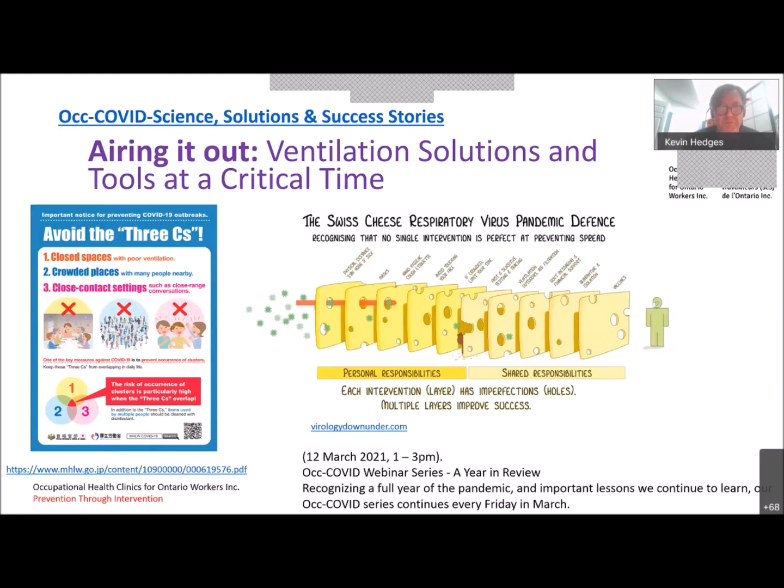There's a very busy slide here, but I did come across a paper recently published on the 10th of March, from the British Medical Journal. It does really talk about the increased risk from the new variant of concern with a mortality hazard ratio of 1.64, which represents an increase in deaths from 2.5 to 4.1 per 1,000 detected cases. In the conclusion, it says that the probability that the risk of mortality is increased by infection with the variant of concern is high. So really, we're in a critical period now.

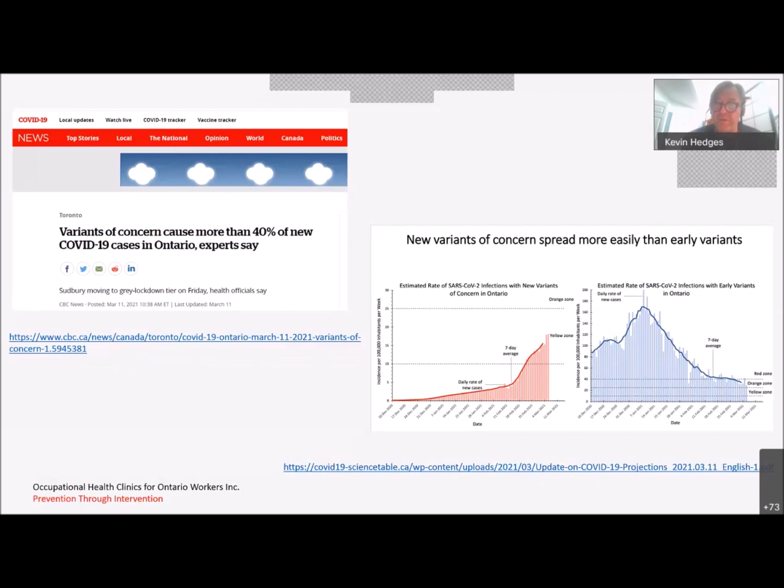So then let me introduce our speakers. We've got Dr. Liangzhu Wang from Concordia University. Dr. Wang joined Concordia in August 2010, has been the Concordia University Research Chair in Building Airflow and Thermal Management. He earned a PhD degree in mechanical engineering at the School of Mechanical Engineering, Purdue University, West Lafayette, Indiana, USA, in 2007.

Our second speaker is Thomas Smith from FreeFlow. I found out about Thomas through a webinar that he co-presented alongside Lisa Brosseau, and it was a really fabulous webinar. You can actually see that webinar online if you go to the FreeFlow site. He's the president of FreeFlow. He's worked for a long time providing safe, efficient, sustainable performance of labs and critical workplaces. He has a Bachelor of Science in Mechanical Engineering from North Carolina State University and a Master of Science in Industrial Hygiene, what a great combination, from the University of North Carolina.

He's served on numerous committees for development of national and international standards on ventilation for safety and health, and he serves on the board for the International Institute of Sustainable Labs and is a member of the Alumni Hall of Fame for the Mechanical and Aerospace Engineering Department at North Carolina State University. And I just want to welcome back Dr. Jeffrey Siegel.

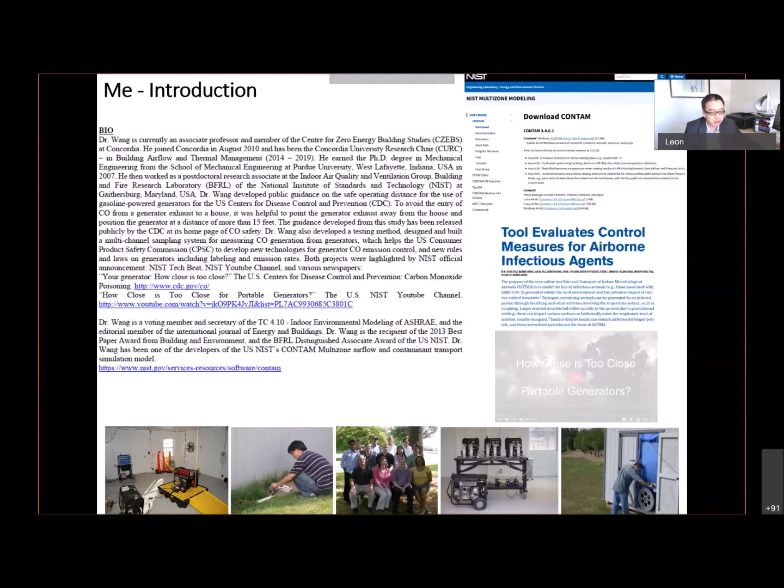Then talking about COVID, as Val mentioned, it was almost over a year before COVID-19 was recognized as a global pandemic. And it was not until early October last year that airborne transmission was recognized as one of the major routes of transmission.

When the infected person speaks, talks, and sneezes, the virus-loaded particles can travel a far distance driven by the air flow. Depending on the building ventilation system, you may have mechanical ventilation or natural ventilation by only opening the window.

There are different strategies to mitigate the risk level. Wearing a mask is considered the most effective measure, and staying less time in the buildings and reducing the number of people in the space will also help. On top of ventilation, increasing the outdoor ventilation rates through your mechanical system or by opening the window will also help to dilute the viral load in the space.

If you have a mechanical system, upgrading your filter in the ductwork, like MERV 13, can also help. And lastly, but not least, using portable air cleaners will also be a strategy.

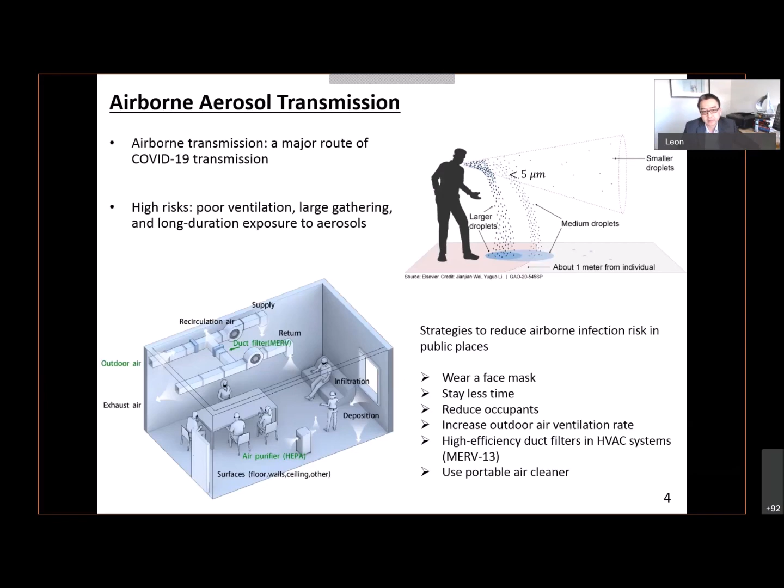So I think one of the first important things, and critical, is to quantify the airborne infection risk. There's a well-known model called the Wells-Riley model. The concept of this model is in terms of quanta. If we have one quanta of COVID-19, that's calculated, the chance to get infected will be around 63%, as you can see from this equation.

So the quanta numbers inhaled by the person is a function of the concentration in the air, that's the C average, and your exposure time. The longer you stay, the higher the risk, and also the number of people in the space, the percentage wearing a mask, the mask efficiency, etc.

So the first concept to evaluate the risk is called individual risk, or conditional probability of infection. What it means is if you have an infected person in the space, in the room, as you are in the same room, the chance you can get infected is called the individual probability of infection.

In comparison, another concept is called building or community level infection. This is a function where the risk is a function of the prevalence rate in the region or city. So if you're not sure if there's a person infected in the space or not, the probability of infection of a person in the room depends on the local prevalence rate. And the more people in the space, the higher probability of an infected person being in the space. That's why we call it the building level infection risk.

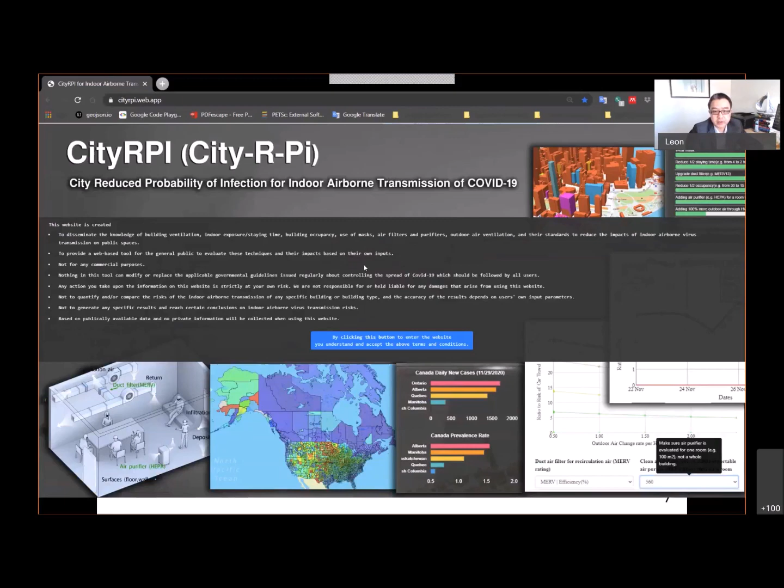So this is the website. If you search, I think we can also provide a link, the front page. I also have the website opened up. Can you see my screen? Yes. So the first thing you will see on the front page is a disclaimer, and then you click here to get in. The first thing we'll look at is the whole North America map, USA and Canada.

And the color shows, red color shows higher risk of infection for airborne transmission. All these rates are calculated based on the daily prevalence rate for a city. You can move your mouse around. Right now for the apartment type of building, I think it's around Missouri in the States.

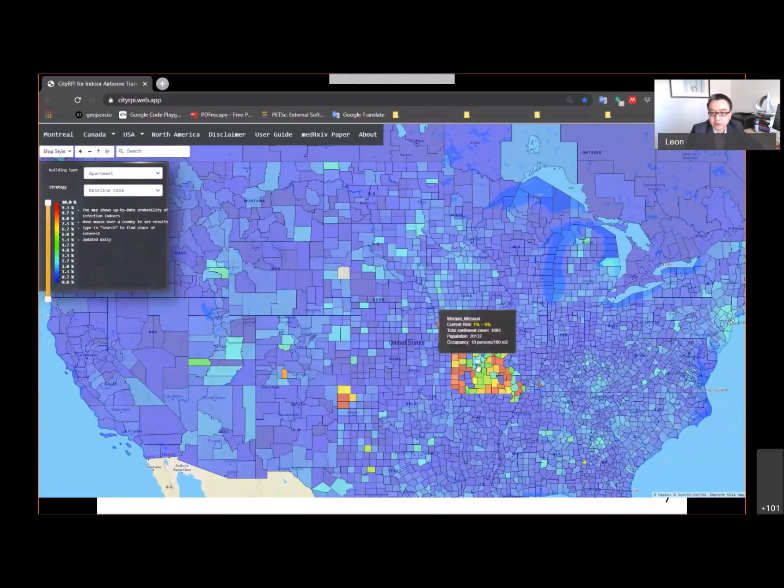If you go to Canada, you can also check Quebec. So right now for this region, the current risk, in terms of building risk, is less than 1.1%. The total cases so far are close to 9,000. And then you can also select different types of buildings.

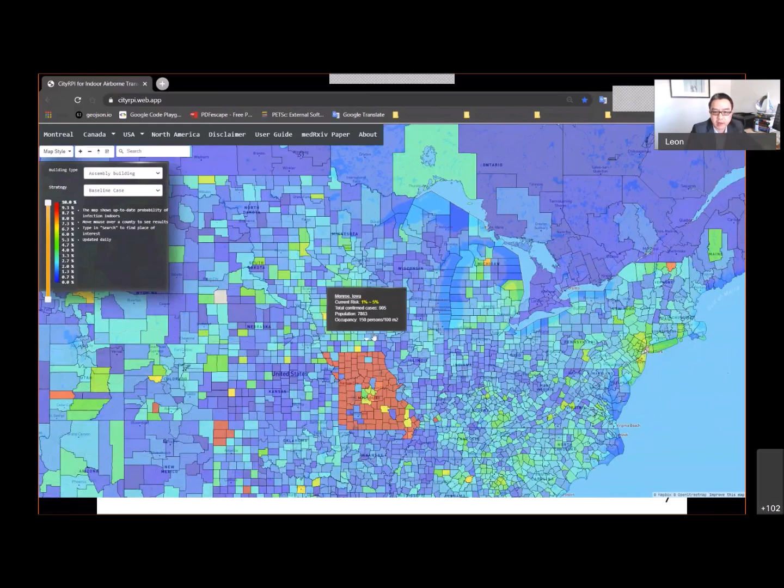For example, for an assembly building, where we have more people's occupancy and probably more poorly ventilated spaces, you can have a higher risk. At this drop-down box, you can select different strategies to get an overall idea of how effective different strategies can be.

So wearing a mask, how effective is that compared to the baseline case of no mask. You also have reduced staying time, filtering with MERV 13 on a relative scale, and ventilation rates. So this is the one user interface.

Another user interface is on the city scale. I click Montreal. On the left-hand side, you can see a drop-down list showing the current prevalence rate and new cases in descending order. For example, in Canada, as of today, the province with the most new cases is Ontario, with about 1,371 cases. But comparing among all provinces, Saskatchewan has the highest prevalence rate, about 0.53%.

You can also compare for the USA, the city with the most new cases is New York City, with over 7,000. This database is updated daily using the New York Times database.

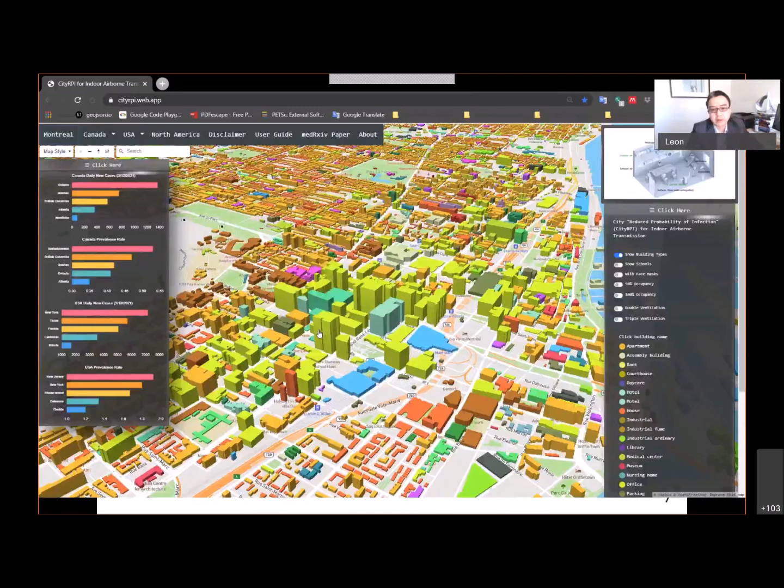On the urban scale, you can move your mouse around to check buildings of interest, and there's a list of strategies you can evaluate and compare. On the right-hand side, there's a list of building types. You can hide or unhide buildings. If you click apartment, it shows these apartments, and you can check what the risk and strategies would be for an apartment building.

I also provide a link to show schools, which I think is one of the major concerns. You can also check strategies on the city scale, 50% or 100% occupancy, ventilation, etc. The color shows how effective the different strategies are.

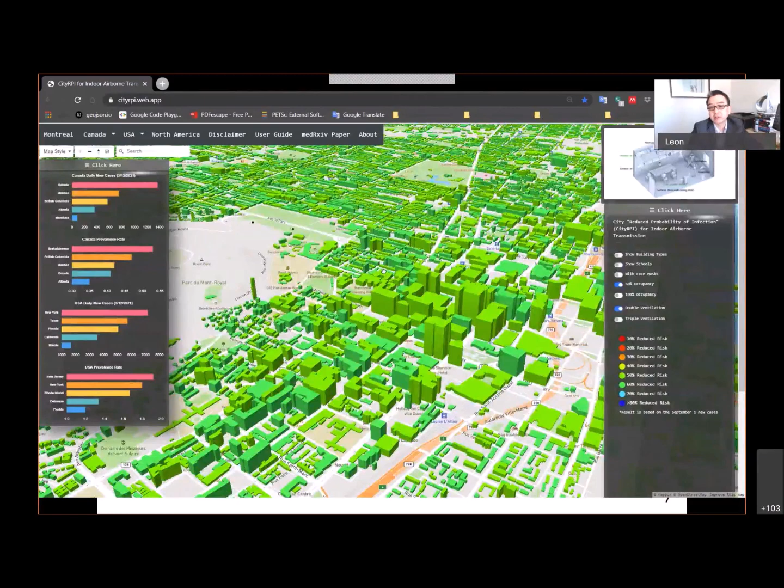On the other hand, if you are a building owner, engineer, or manager, you know more details about your building, for example the size of your space, the number of people, and your ventilation system, air turnover rate, etc. You can search for your building and click to provide information for your own building, so you can do a more detailed analysis.

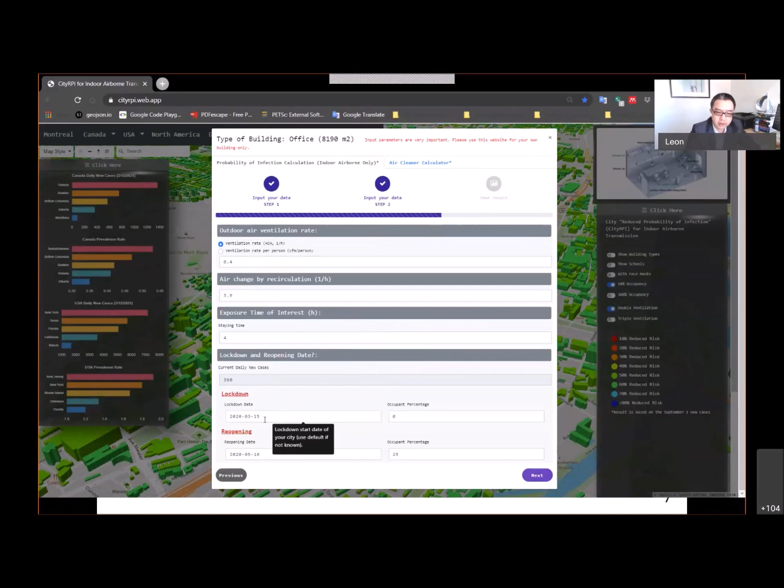Different cities, provinces, or countries have different lockdown dates, so you can also provide the lockdown schedule for your city. If you click next, it gives you the full period risk level in terms of building risk, for the last month or last 7 days.

There are also ways to evaluate the risk level versus outdoor air ventilation rates, with or without a mask. At the bottom is a comparison for different MERV ratings, 8, 9, 10. Each MERV rating provides a different efficiency of filtering viruses, for example 20% for MERV 8, and up to 95% for higher ratings.

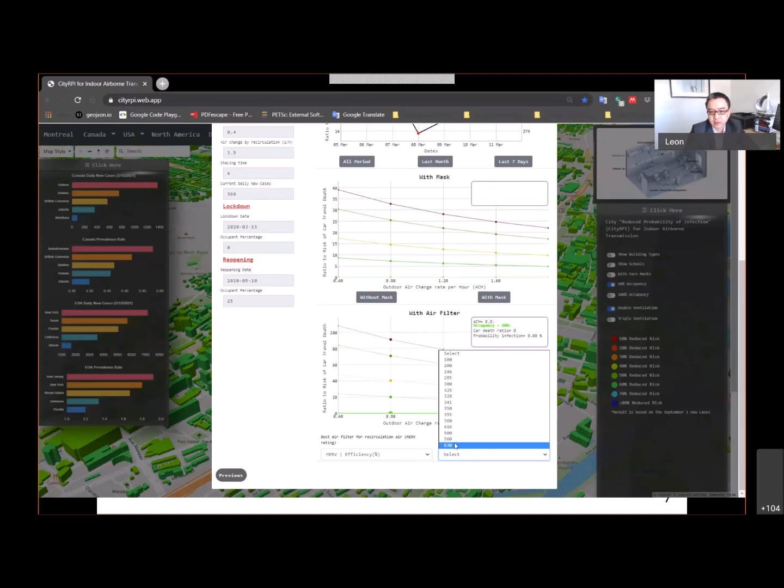On this side, you can also select if you would like to choose an air purifier or cleaner. You can choose the capacity, called CADR, clean air delivery rate, and see how effective different capacities of air cleaners are.

There's another tab called the air cleaner calculator, based on the Harvard and CU Boulder portable air cleaner calculator. If you want to size your air cleaner for a space, you can provide information here, and there's a scale to evaluate the acceptable ventilation condition: good, excellent, low, bare minimum, or ideal. In this case, a 4 to 5 air change rate is considered good ventilation conditions by this calculator.

So that's the website. If you have a chance, take a look, and if you have any comments, we are still improving the website, so please send them along.

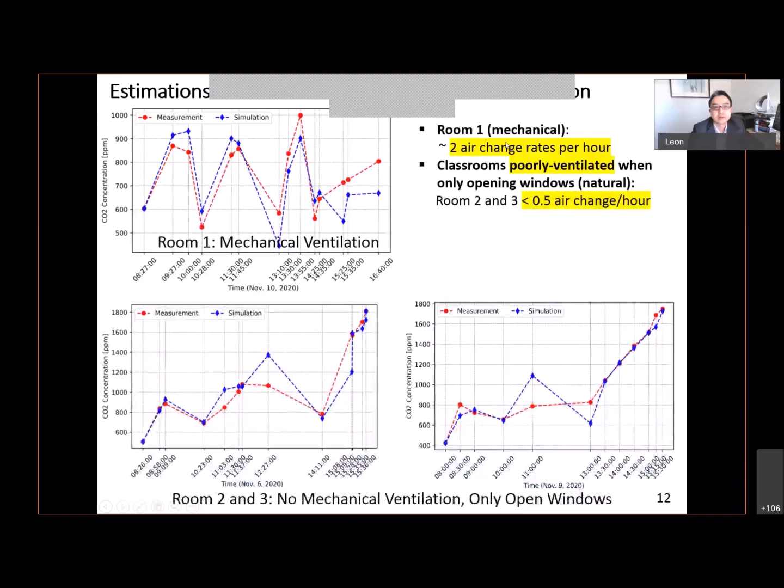I think Sarah mentioned the importance of CO2 monitoring. Last year, near the end of the year, I think November, some Montreal school teachers measured the CO2 level in classrooms secretly, and they had the data but didn't know how to interpret it. In some rooms with mechanical ventilation, the concentration could be close to 1,000 ppm. Some classrooms with natural ventilation could reach 2,000 or even higher concentrations.

They contacted me and I tried to help interpret the data and relate CO2 levels to ventilation conditions. They provided the type of building, ventilation system, volume, occupancy schedule, number of students, and age. Age is important because different ages have different CO2 generation rates.

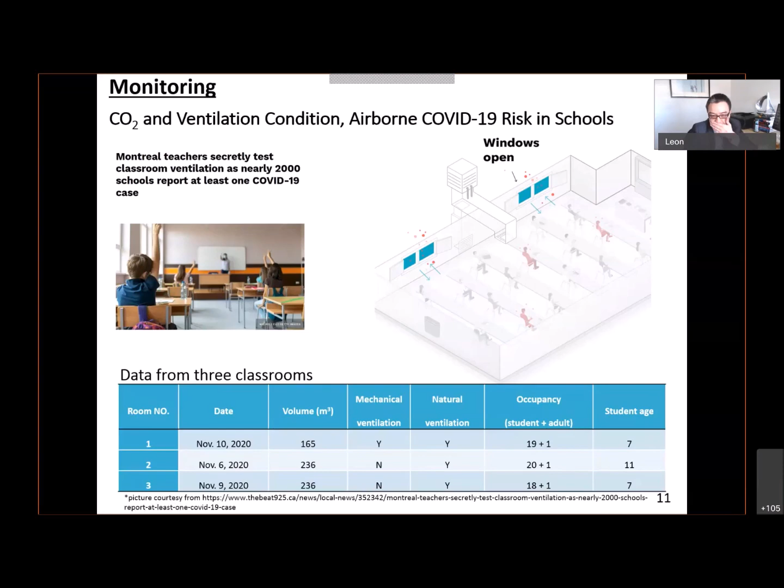So as you can see from this result, room 1 is with mechanical ventilation, and the CO2 level found is close to 1,000 maximum, that's the red line. For rooms 2 and 3 with natural ventilation, where the rooms only have windows open, at the end of the day the concentration level is close to 2,000.

So by using a method called Bayesian calibration, a statistical method where you can evaluate the uncertainties and probabilities of different parameters, we can infer what the ventilation rate would be based on the CO2 measurements.

Based on these methods, we are able to estimate for room 1 with mechanical ventilation that the air change rate is about 2 air changes per hour. For rooms 2 and 3, where only the windows were opened, the ventilation rate is less than 0.5 air changes per hour. So compared to the 4 ACH I mentioned previously, all 3 rooms are poorly ventilated, even the one with a mechanical ventilation system.

And to help teachers get a better idea for other cases, we developed these charts. What these charts tell us is how we can estimate ventilation rates from the time-averaged CO2 level.

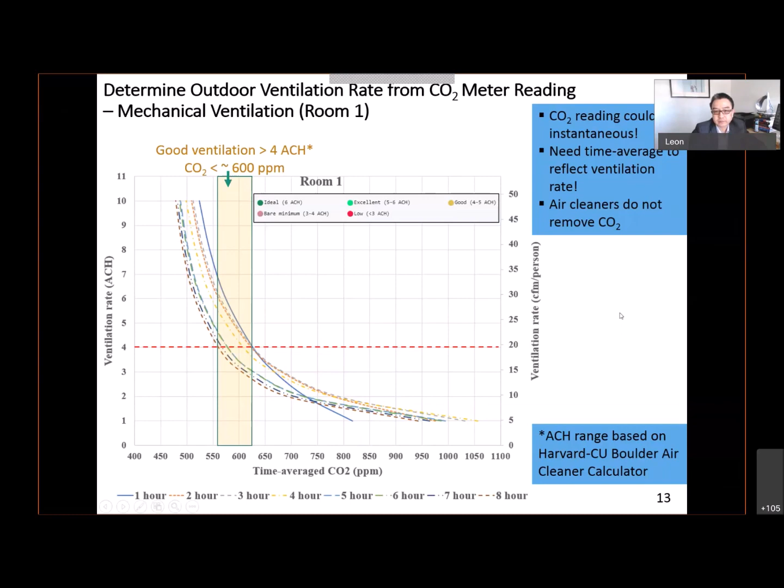To avoid spreading, the time-averaged CO2 for 6 or 7 hours of exposure, we're looking at 500 to 600 ppm for the COVID period.

Luckily, the Montreal schools have realized the importance of CO2 monitoring, and they started collecting CO2 data in over 400 schools since about 2 months ago. The data is still updating on their website, so we're helping them analyze the data, probably using the same method we are proposing.

And once we have risk evaluation models, we know what the existing conditions are. Now the next thing is how can we mitigate the risk, particularly for public buildings, considering we're likely to have reopening of public buildings pretty soon.

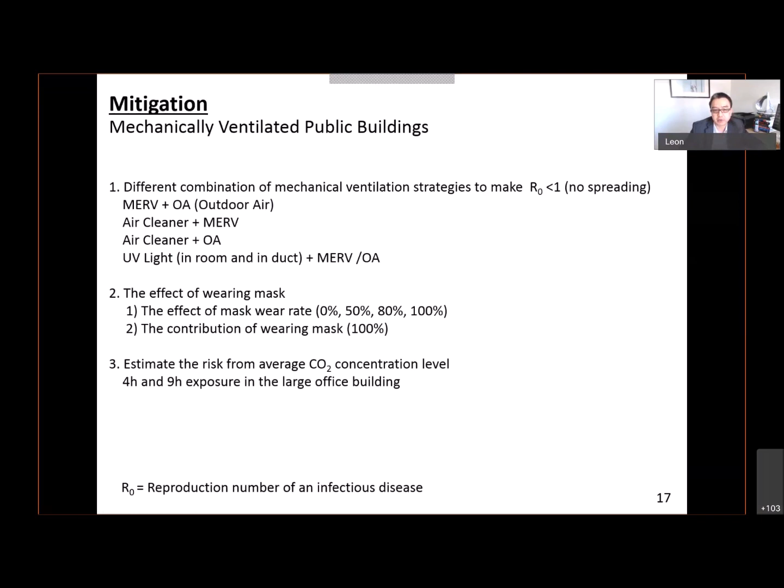So these are all the models we can evaluate. At this moment, we're focusing on medium office buildings, large office, small hotel, retail, and secondary schools.

All these models are available and based on the Archetype library developed by the Department of Energy, which they provided to us. So I'll show you a result here.

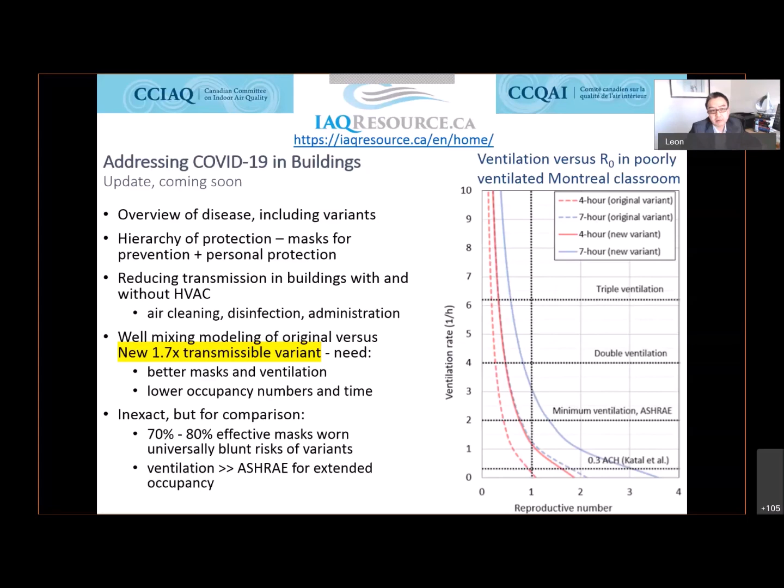Lastly, I would like to acknowledge the financial support, partially by the NSERC Discovery Grants, and special thanks to my colleagues in the States, Dr. Miller and Dr. John Zhai from CU Boulder, Dr. Michael Lacasse from NRC through the Eureka Project, and a few others at NRC, and Dr. Meg Sears from CCIAQ and other CCIAQ members working so hard on this module, and colleagues at US NIST for helping with simulation, and of course my colleagues at the Centre for Zero Energy Building Studies at Concordia.

I also need to acknowledge the support and data providers of CO2 data, and all the contributors and collaborators from Montreal schools. So that's my presentation. Thank you very much.

Thank you very much, Dr. Wang. There's a great amount of information there, and it's great that we can now have a look at the tool and play around with it. And really, it's about risk communication, isn't it? What gets measured gets noticed, and what gets noticed gets action. So it really helps us focus in on where the higher risks are.

What we thought we'd do is pitch a couple of questions at you. We see a question from Dorothy Wigmore in the chat box, for you, Dr. Wang: What criteria are you using for face covering efficiency in the program? And have you accounted for the new ASTM standard? We know we're just talking about face barriers here, and there are issues around face fit which aren't really dealt with very well, but maybe that's new. I'm just wondering if you'd want to comment on that.

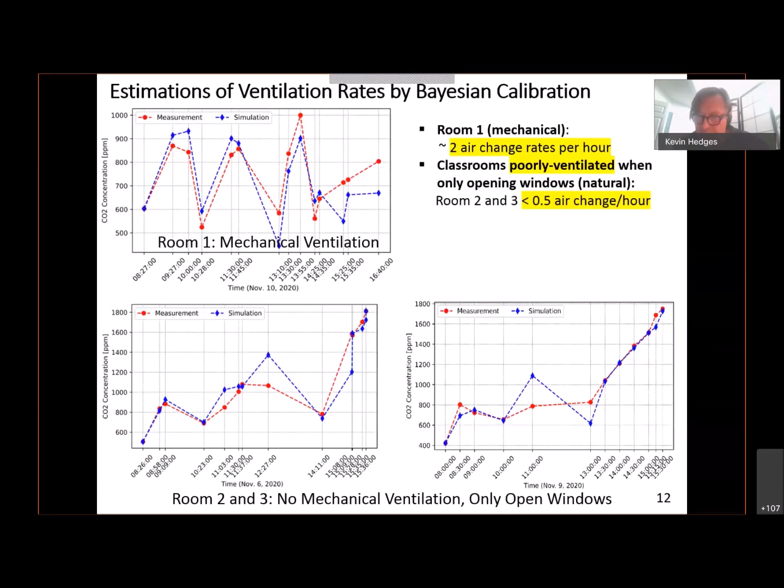Maybe one of the other speakers can address this further on down. Can the residence time of the air in the unit be long enough to be effective? Maybe one of the other speakers might chime in too.

You're welcome to talk about UV light, because for this public building, we do the modeling, and for majority of buildings, we find UV light in the upper room is quite effective compared to the UV light in the duct.

I don't know if that answers your question, but you have to be very careful about UV light because it generates other things, right? I mean, ozone, and it may have other problems. But in our analysis, UV light is pretty effective. I think we assume that UV light increases the effective air change rate, and we use that in the analysis.

Great, thank you. More from Dorothy Wigmore: Can you explain how the number of people in a space affects carbon dioxide? Does it not affect using specific numbers as cutoffs for carbon dioxide?

Yes, like I mentioned, definitely you have different situations. The result I showed we use only for classrooms where the students have a pretty much lower CO2 generation rate. If you consider a gym where adults work out, the generation rate of CO2 can be much higher, and then different strategies should be implemented. So the method we presented can be applied for different situations.

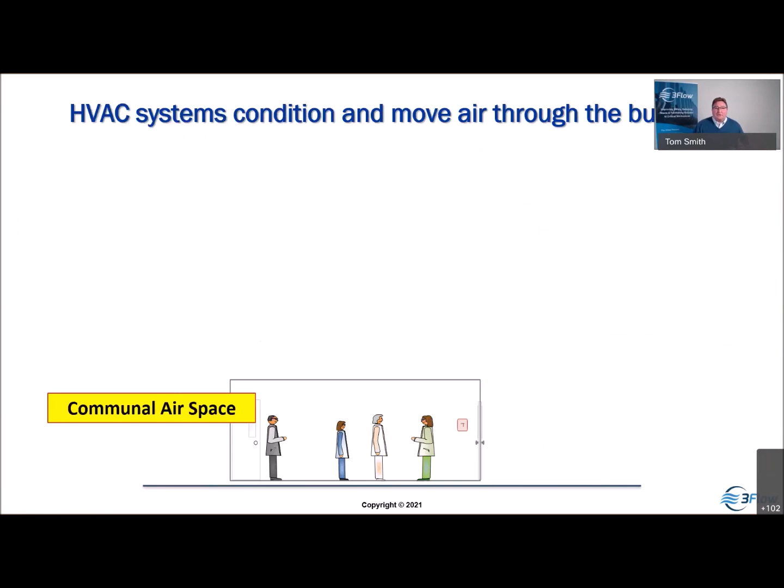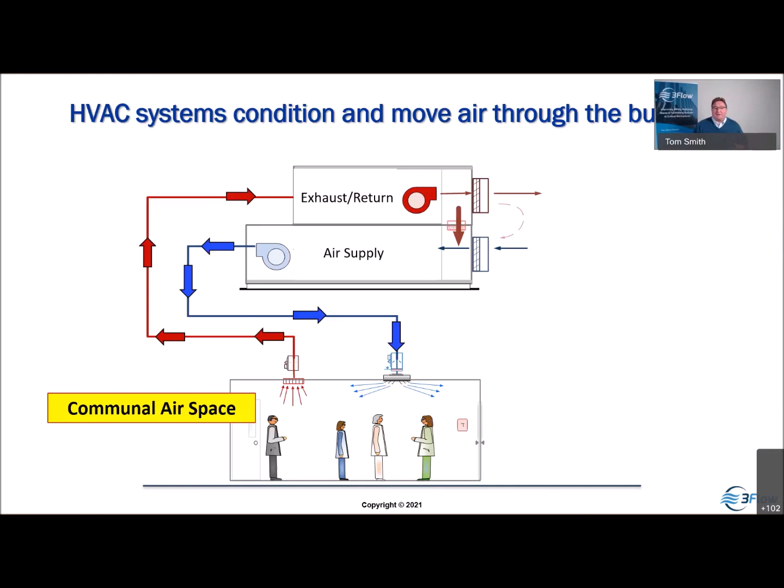Now we can add some ventilation systems, air supply and exhaust. That's going to provide air to the space and bring air out of that space - that's the ventilation component. And we need to look at how much of that air is recirculated versus fresh air.

We can start to look at these systems in terms of what's happening below the ceiling and what's happening above the ceiling. Our remediation measures should focus on what we're going to do below the ceiling, where the spread typically occurs, and how we better equip the systems to provide an environment conducive to safety and efficiency.

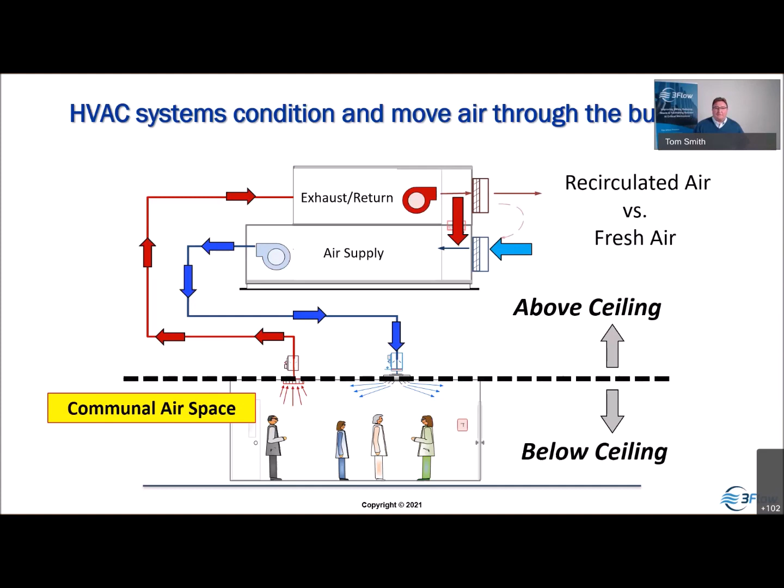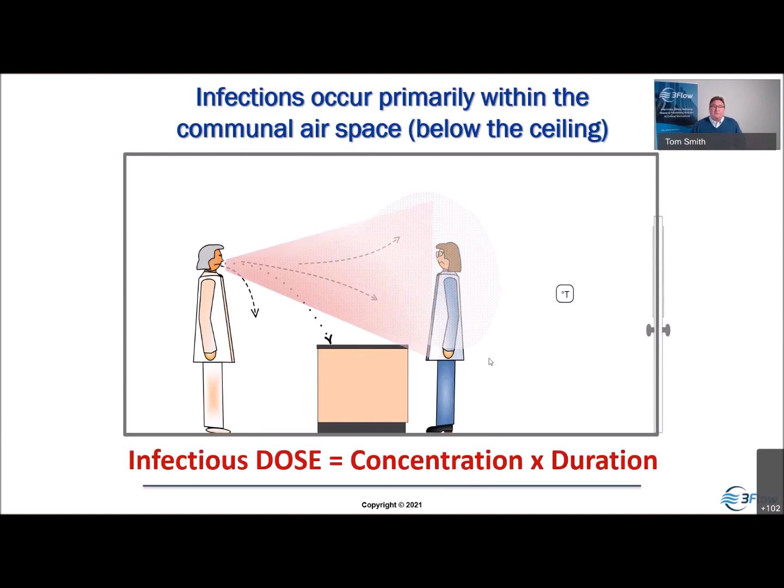So we know that infections primarily occur in the communal airspace, where two people are sharing the same air. One may be infected and the other may be healthy - they're only healthy for as long as they can resist that infection. And so we start looking at what I call the cone of corona.

As people are exhaling, they're emitting particulate which may be laden with the virus, and that may be potentially spread to other people in that space. The amount of material generated by an average person is quite significant - 40,000 particles every 15 minutes. That's going to increase or decrease, as Leon was saying, depending on the activity - it can produce much more or less depending on what they're doing and their state of health.

We don't currently know the infectious dose for corona, so we have to go as low as we can. But the infectious dose is the concentration times the duration of exposure, and that's very important - we want to limit the concentration and the duration.

So now, as we look at this, are you downwind? Are you in the path of this particular concentration?

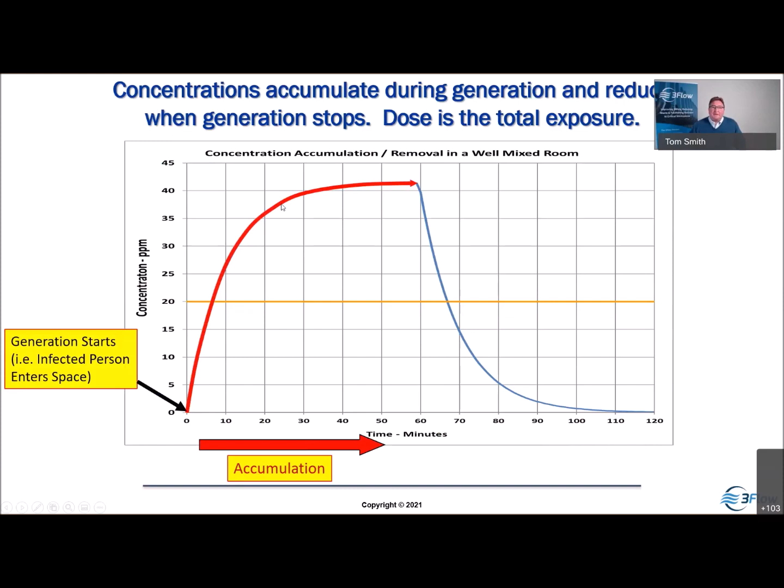Looking at accumulation in a space - when someone walks into that space and they're exhaling particulate, potentially laden with the virus, then it begins to increase in that space. And if it's a well-mixed space, it increases and continues to increase until the generation stops.

Now it's going to reach some point of what we call a steady state concentration, but when that person leaves, it begins to decay. And it's this area under the curve that's known as the dose - it's the time you begin to be exposed till the time that person leaves and beyond, when the room removes those particulates. So dilution and contaminant removal become very important.

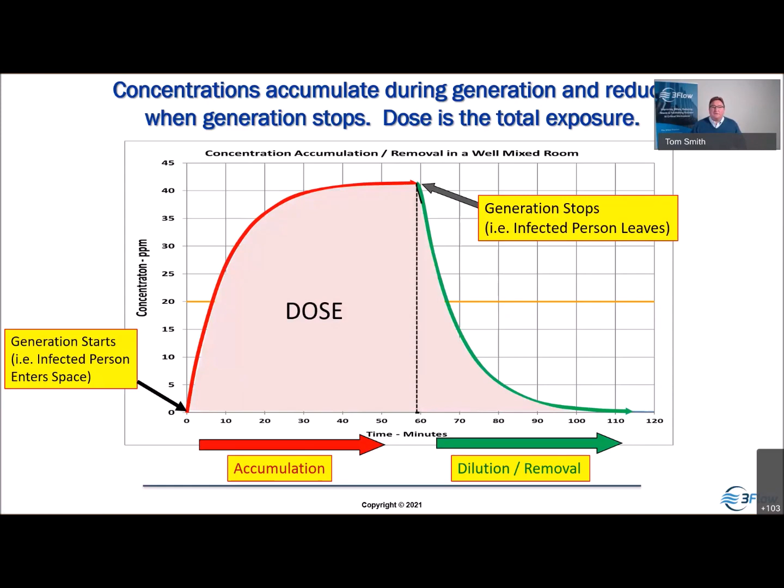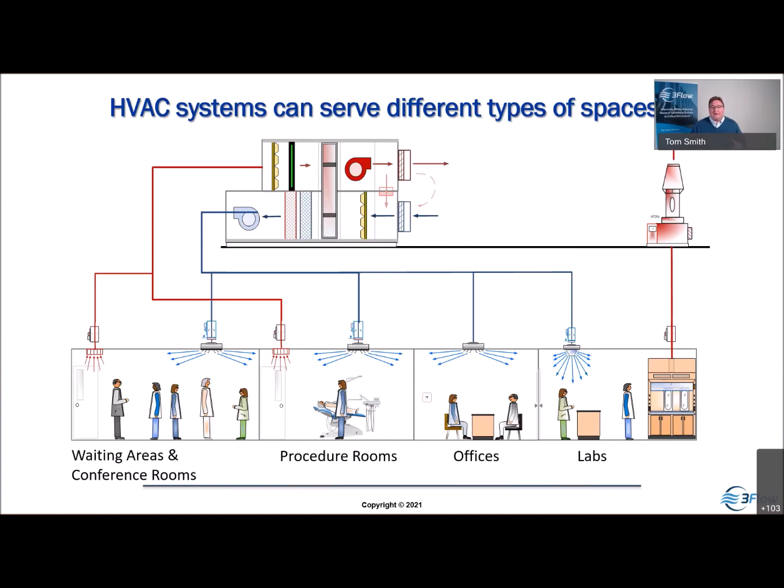All of these considerations are a function of this well-mixed space, but we don't know if that's a good assumption or not. We have to look at the ventilation systems serving multiple different areas - there may be different requirements between a waiting room or a procedure room or offices or labs. They have different functional requirements and therefore may have different design and operational parameters that we have to include.

So we can look at the question: what is good ventilation? What is good for one room?

Is that adequate for another room? And what are the risk factors that might come into play if we're going to evaluate these different spaces? Having decades of experience working in laboratories, I operate a business. I have to have people come back to work. We have different types of spaces, from offices to conference rooms, break areas, and training center. So I need to be confident that I can bring people back into the space safely. And what are these risk factors?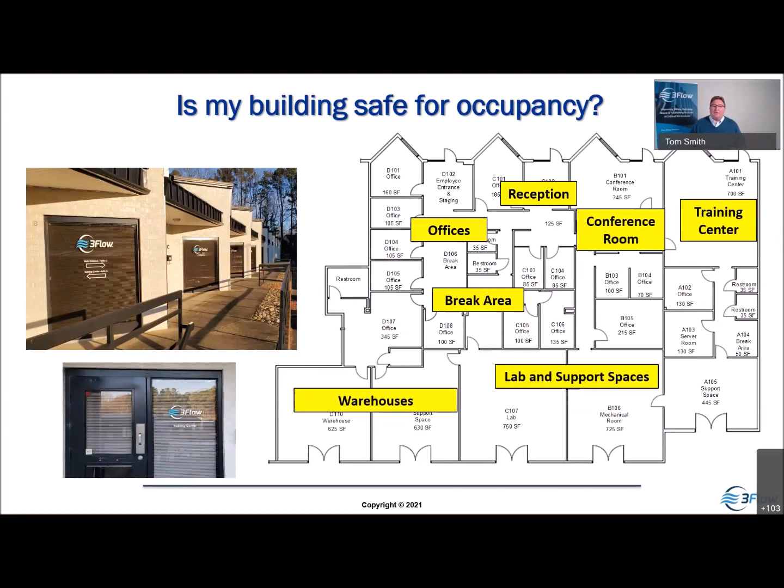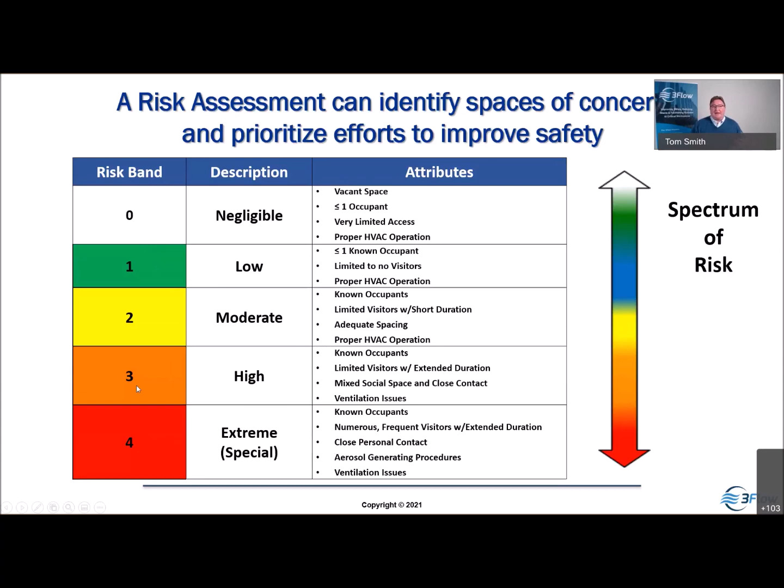That led us to use some of our experience from labs, where we categorize labs in terms of the severity of the hazard, the quantity, how it's being generated, to quantify or create a risk banding process. Negligible might be a space where you have no occupants or one occupant who can't infect themself. As you move down the spectrum, you start including things like ventilation and other administrative controls, and how many occupants are in close proximity—these factors become very important. So you can now look at a way to categorize spaces as a function of their relative risk.

A traditional ventilation investigation evaluates first: what is the risk? What's the demand for ventilation? Where are the spaces of concern? We want to then inspect and measure the operation of the HVAC systems, then look at the airflow patterns within that space. Airflow patterns matter. And then finally, if we have to, we can go to a quantitative test to conduct aerosol tracer studies to evaluate the effectiveness of the space and the benefit of adding mitigation strategies such as local air purification. So let's start first by looking at our risk assessment.

We take our floor plan—it's the first piece of information you need. Get your floor plan, and then on it, locate where people congregate. Where are the known occupants and how many people occupy the different spaces? Where are visitors coming in? How many visitors? It's a very simple analysis to do. That gives us one piece of the puzzle.

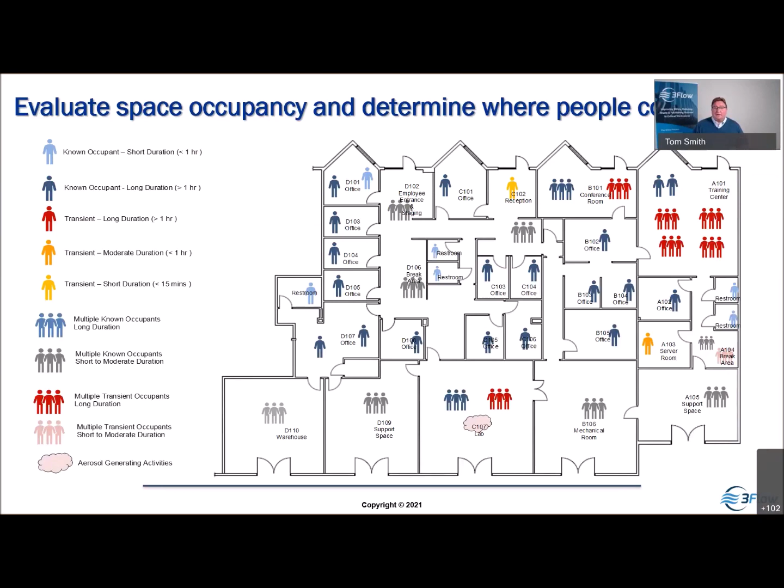Where are people congregating? Then we look at the layout and configuration of the system. We have supply diffusers and exhaust grills, and hopefully they're coupled in each room where you have a supply and exhaust, and hopefully we have ventilation. We want to look at the types of units—are they recirculating, or outside air? How is that operating to help us protect people?

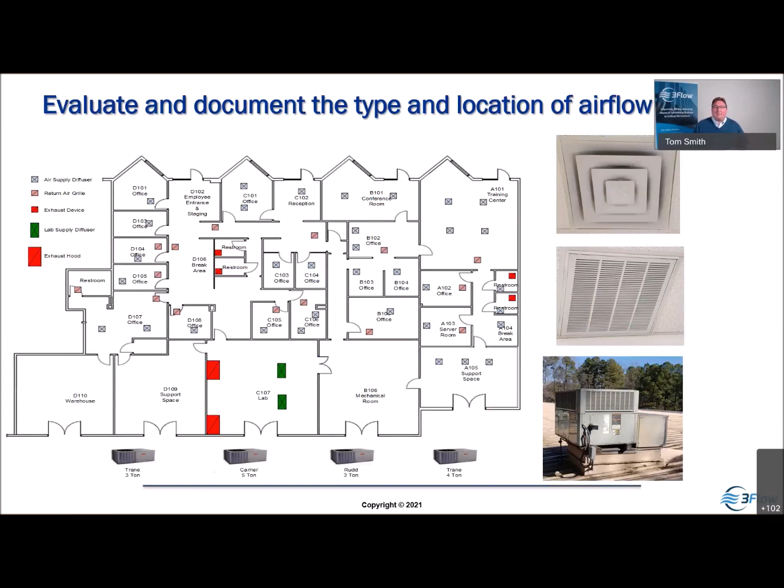Now we take this information and put it into a spreadsheet. We developed a simple spreadsheet—it's public domain, you're welcome to it, just send me an email. Information will be available here at the end. If you like, you can input information about your space, the size and type, the operation, information about your occupants, some HVAC information, and then it'll calculate the associated risk with that space.

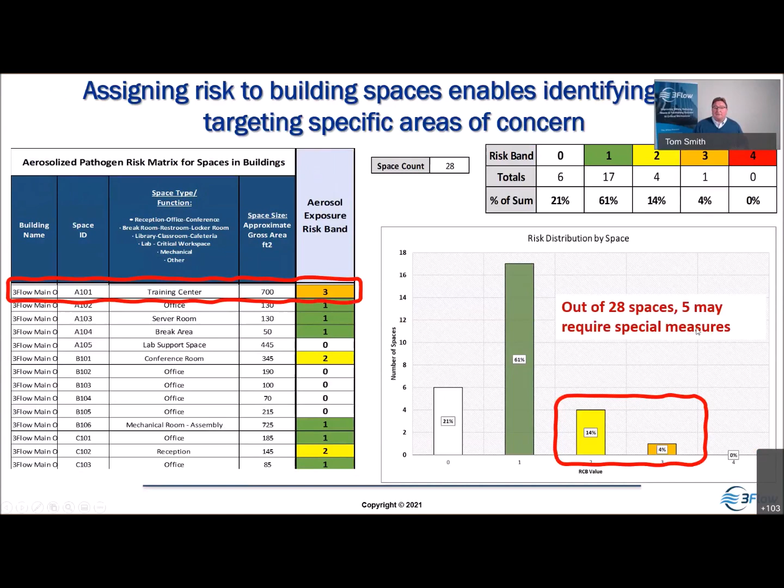Now, it's not as sophisticated as Leon's model, of course, but we're trying to sort spaces first, identifying spaces of concern. By having this kind of categorization and a list, we can identify spaces and differentiate them by their level of risk. As it turns out, in my office space here, we have 28 spaces, and only 5 are going to require some special measures. So we're now targeting the areas of concern. Putting this on our color code, we've color coded the floor plan—very simple, easy to do—and we identify the spaces that we have to take some more action on.

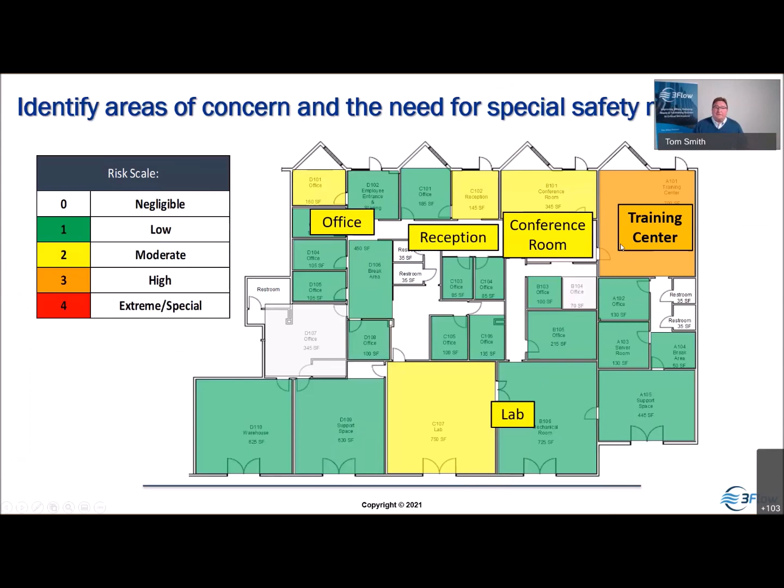In our case, the training center is very important to what we do. We always want to enhance the knowledge base of people and have them go out there and implement solutions that work. So the training center, we need to bring people back, and that's an area that we're going to focus on as our highest priority.

So we need to move to the next part, which is inspection of the operation. Now we get a layout of the system that's serving our training center. The blue is supply and the red is exhaust. We can see that we've got a network of supply going out to the space and we have exhaust returning. But we need to know what the air change rate is.

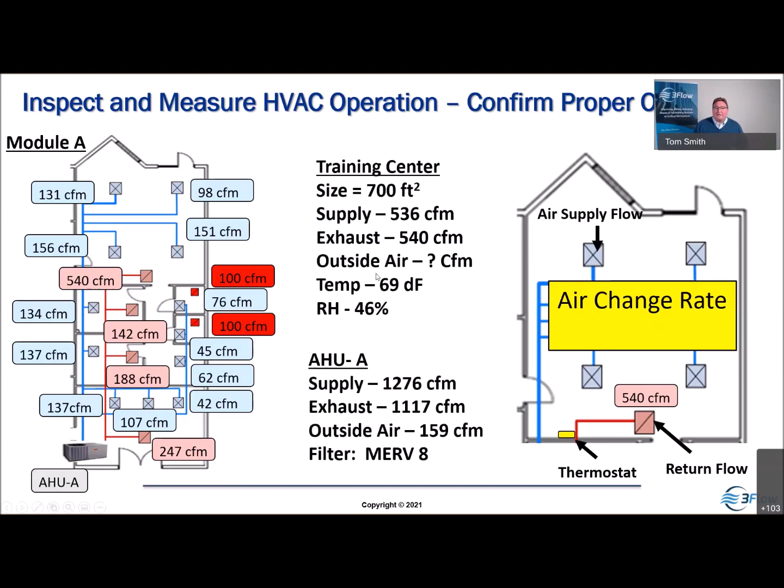So we have to then do some measurements, and we look at the measurement of these values. You can get a local test and air balance company or your HVAC contractor to do these measurements. They're quite simple, and then do some correlation and calculations. It turned out that we're able to calculate the air change rate—but I have a question here, because we calculated 4.6 air changes per hour. It sounds like a lot, but this air is recirculating.

It's going from this space back to the air handler and then back to the space, so it has a potential to recirculate contaminants back into the zone. So how much of this is outside air or fresh air? We need to make that distinction, so we're going to evaluate that a little bit further.

Okay, we've got the air change rates, but what do we know about the airflow patterns in that space? So looking at some airflow visualization tests, a very simple tool, we generate a little bit of smoke using different methods. This is a handheld smoke generator, and we can visualize the airflow patterns in the space.

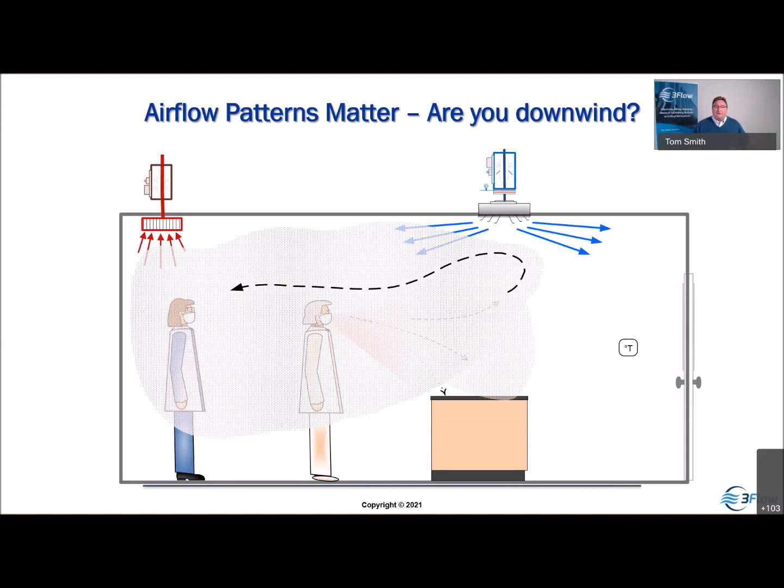It's very helpful to see where the airflow is going. The airflow patterns matter because you may not be downwind of the infected person, but once you add the HVAC, say with a supply diffuser here and exhaust over here, even though the infected person is breathing away from the healthy person, the airflow patterns show those materials circulating back towards that healthy person. That's where the exposure is going to occur. So we want to understand the airflow patterns in the space.

So we took that a step further. We've been using mannequins in our testing of laboratories for decades, over 25 years, to simulate a person in that environment so we can understand their impact on the airflow patterns. In this case, each mannequin is equipped with the ability to exhale a small particulate, a fog that helps us visualize the flow.

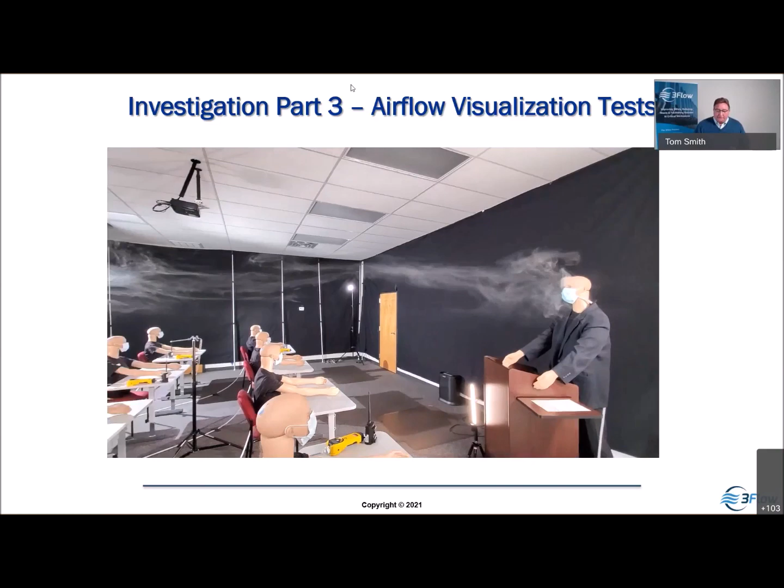So as we look at the airflow patterns in the space, we can see it moving towards and across the room. There's a lot of stratification here. So how well mixed is this space?

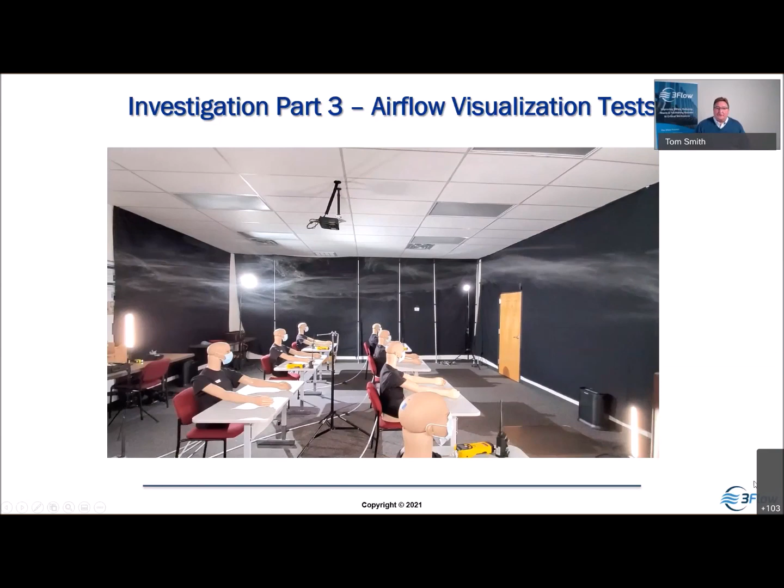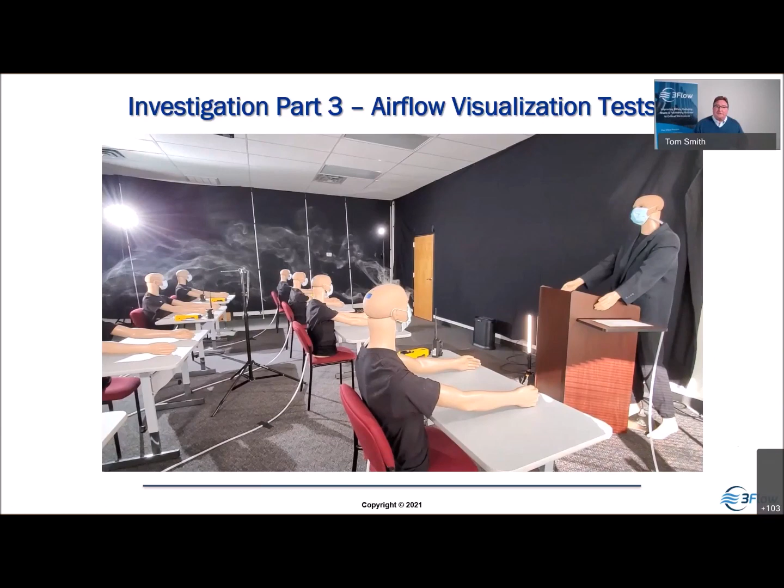If we take a look at another video, this person here is now the one exhaling. They've got a mask on that dampened the projection, but as we begin to see the airflow patterns, they're being released, and because of the airflow patterns in the room, they're moving right to his buddy over here, who's going to be inhaling the effluent from this person. If that person's infected, there's a high likelihood this other person may be exposed and subsequently become infected or ill. So we have to look at the airflow patterns within the space, and assumptions of a well-mixed environment have to be challenged, because concentrations near the source may be dramatically higher than what you'd get in a well-mixed scenario.

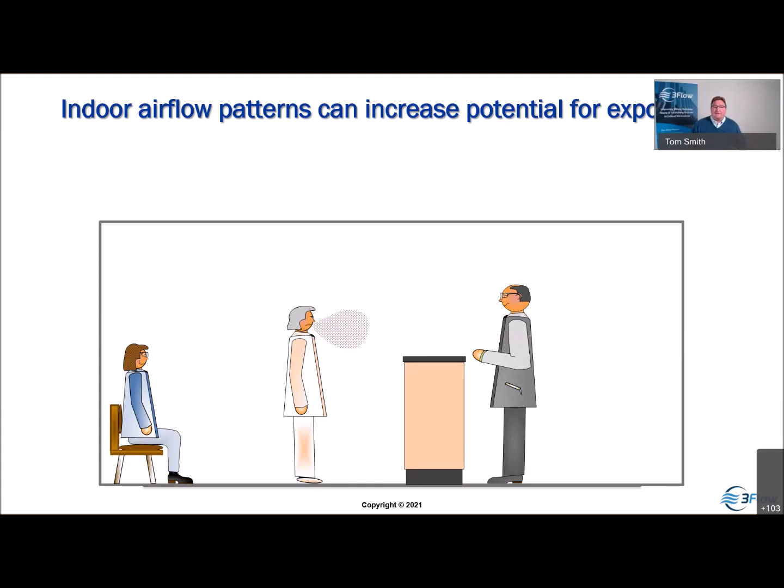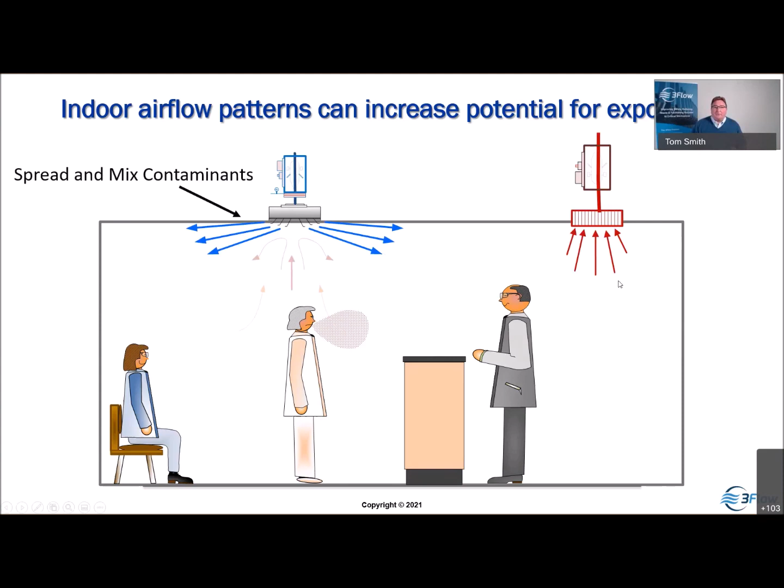So we take this information and start looking at what we can do about it. If I'm in a counter-serve type of business, maybe a pharmacy, an auto parts store, or a lunch counter, I'm a healthy person working in that space, but I've got visitors coming in. I can't control who walks through the door, but I anticipate someone might be infected depending on rates in the area. So if I add my HVAC and notice I've got a supply diffuser over here and exhaust behind this person, where are the airborne materials going to go as they mix with the air? They're going to spread throughout the space, ensuring everyone gets exposed.

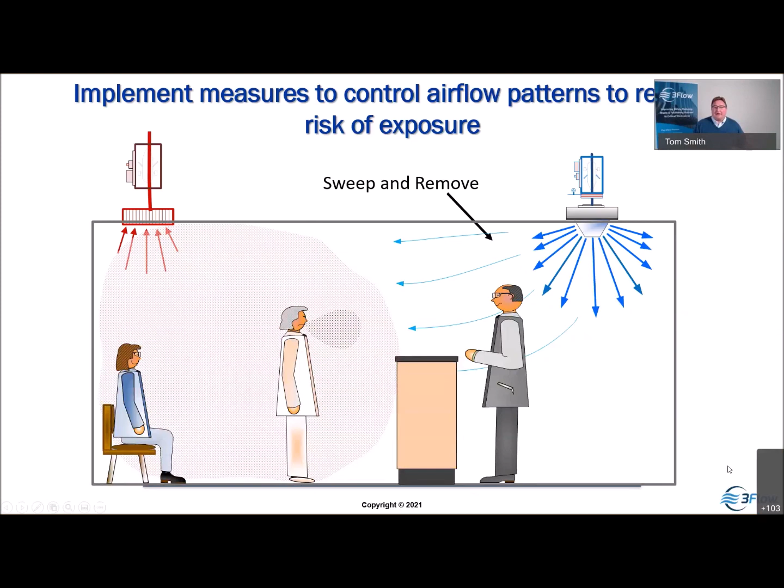Now we could take the same concept and just flip the air supply and exhaust. Now this person's standing in clean air that's helping to sweep material back towards the exhaust, providing a bit of isolation by having the airflow work to our advantage, helping move the materials where we'd like them to go. That's the way labs are designed, to go from low hazard to high hazard. You walk in the door into a low hazard area, and as you move towards the back of the lab, you go to higher hazard areas. This concept can be applied to the design, operation, or renovation of spaces.

Take a waiting area, where people come in. When I took the children to the doctor, they'd say, sit over here. Then I'd look at the ceiling diffusers and think, it doesn't matter where you sit in this space, you're likely to be exposed. So how do we manage the airflow to create areas of isolation and help mitigate the risk of exposure within these spaces?

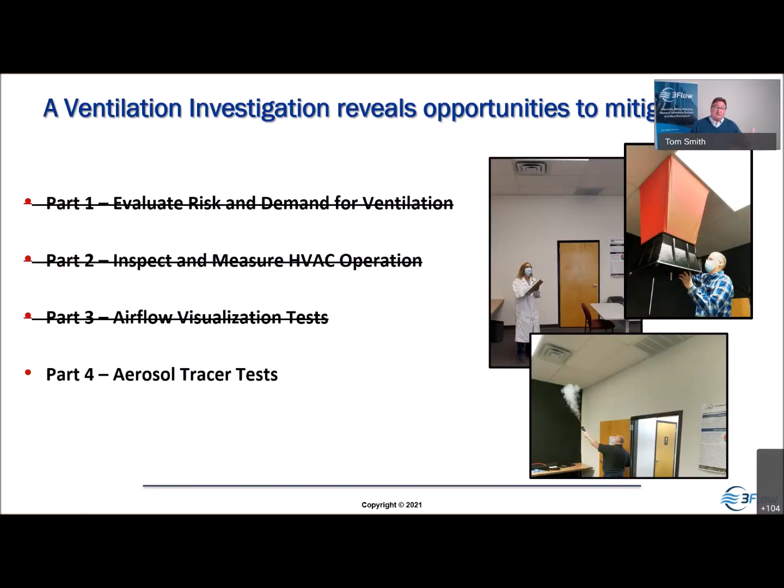It's possible, and the tools exist to do this, but we have to be able to implement them. Now, the last part of it is the tracer test. We've done some visualization, still qualitative. It looks good, but does it really work? And how would we challenge it? So we can add a little bit more sophistication.

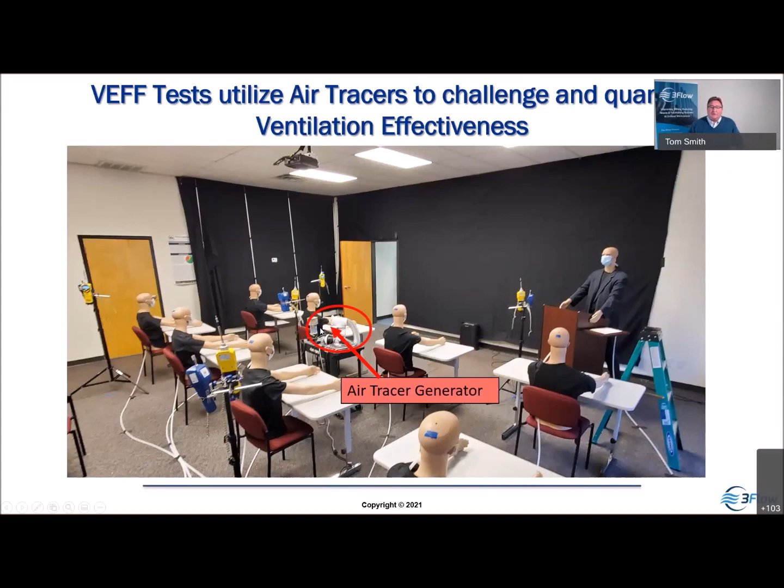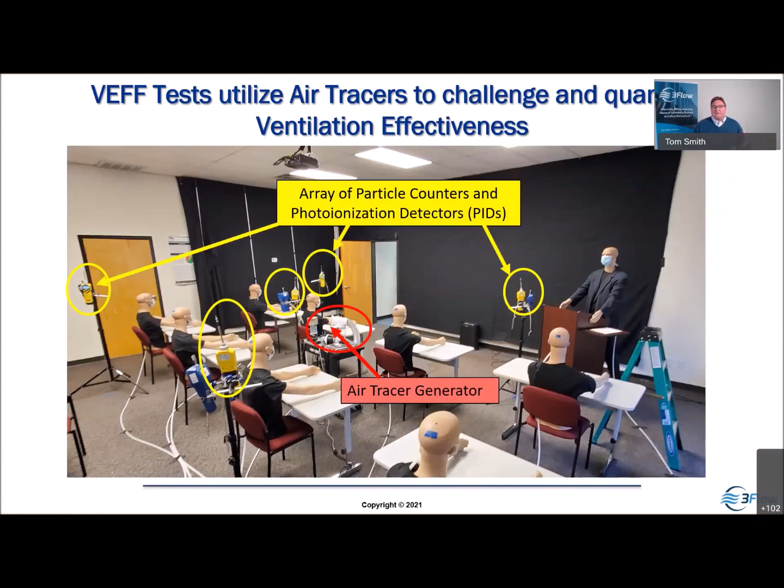We've got methods to generate an aerosol tracer, so we can generate it, look at gas concentrations, particulate concentrations, and look at the spread throughout the space. This allows us to look at dispersion, accumulation, and decay under a whole variety of different operating scenarios.

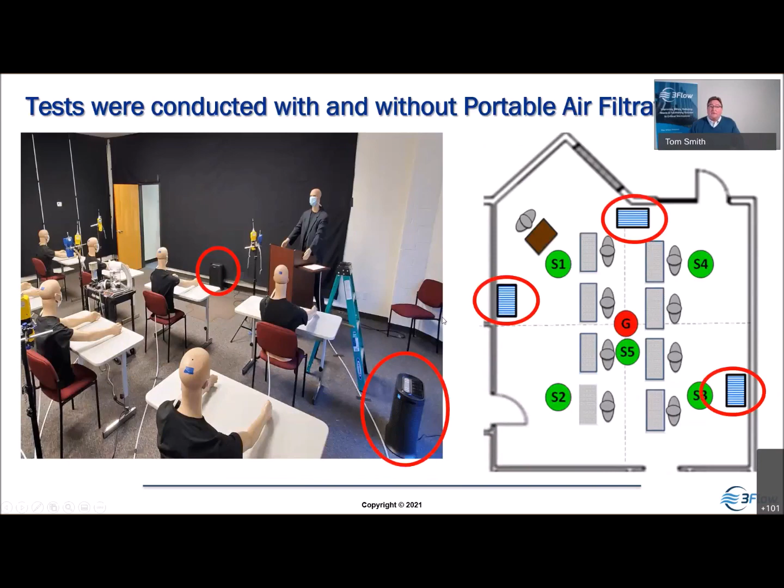In this case, we tested the room at different conditions with and without the implementation of air purifiers. These air purifiers are just on the floor here, generating clean air into the space using filtered air. But how effective are they, and where do we locate them? In this case, we locate them to create some cross airflow patterns, putting the clean air back into the area where the occupants may be sitting.

Looking at the data with the filters off, we found that the actual concentrations were 3.5 times greater than what we anticipated at 4.6 air changes per hour, compared to the theoretical well-mixed condition. That's pretty discouraging. We thought we had a lot of air, but it turns out because of the airflow patterns and the accumulation within the space, it was suboptimal.

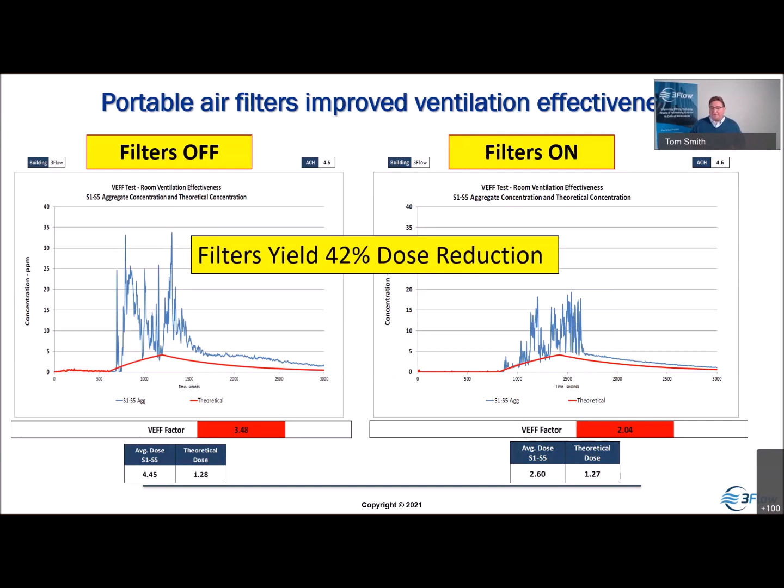When we turned the filters on, it had an impact of mixing the air up a little bit, but it was still 2 times worse than theoretically well mixed. That reduced the concentration by 42%. So just turning the filters on was a significant reduction in the potential for exposure, and that's a positive in my mind. We don't know how low we have to go.

We also were generating particulates in that space, and when we looked at with and without the filters, we saw a 39% reduction in dose. The dose is the accumulation plus the dilution, the entire period of time for the exposure to occur. So what we need to look at is the dose and how do we minimize that. The backside of the curve, the decay, is important, but so is the accumulation part of it. We need to know how much and how long people get exposed.

By looking at this kind of risk-based approach, we know we need a multifaceted program with administrative controls and use of masks and other techniques. But where do we apply them? In the lowest level of risk, maybe it's a vacant space, I'm not concerned about that, not going to spend any resources on it. But as I move towards level 3 and level 4 spaces, that's where I'm really going to pay attention, where it's necessary to make the investment to make better spaces better. By knowing where these spaces are, we can apply more or better techniques.

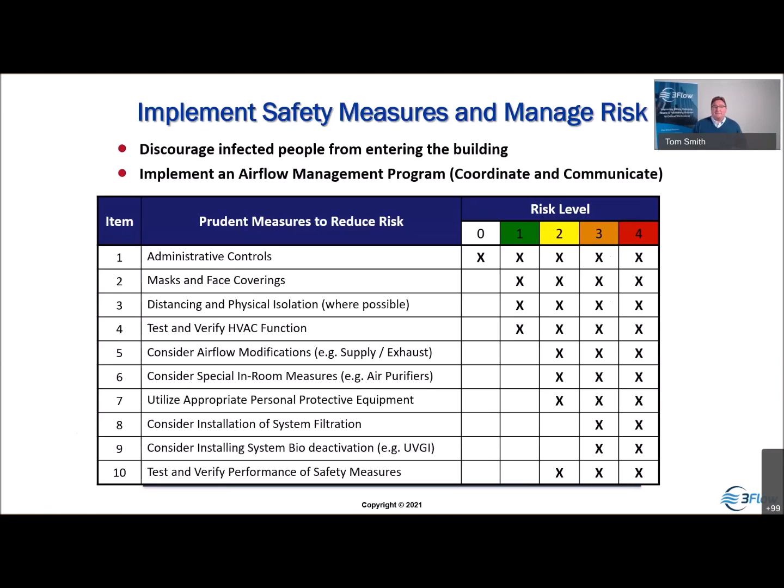That culminates in an airflow management plan. The information you're collecting, the floor plans, the information about the HVAC configuration, how much air flows through the building, that's really good information, not just for COVID, but for long-term operation. This may not be the last pandemic, but there's also things like seasonal flu and other issues, and other indoor air quality issues that come into play. The benefits of having this program can't be understated. By gathering this information, it's not only helpful today, but it's helpful for the future.

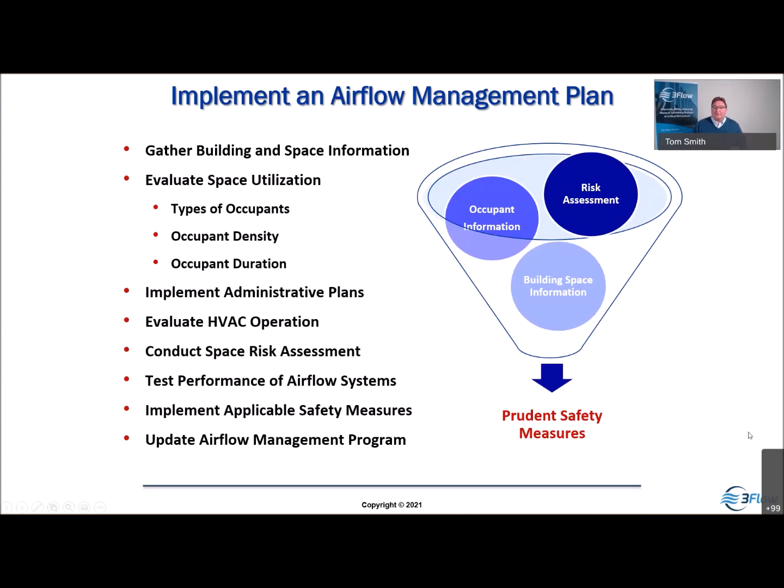Here's some information that you would collect: how is the space being utilized, how do the systems operate, what is the testing and maintenance procedures, and how do you manage change? Because if you change the application of the space, you may have to change some of the operational parameters. So these are parts of the overall program.

So I'll finish by saying that we can evaluate the risk of exposure and the potential for transmission. There's a lot of really cool tools out there to do so. We can evaluate and target spaces based on this risk, and not all spaces are going to require special measures. We can apply modeling to help us evaluate ventilation effectiveness, and apply tests to evaluate accumulation and dilution. We have tools that can be utilized to help reduce the risk of exposure and create safer environments.

The airflow management program is a must. In the United States, part of the American National Standard for Lab Ventilation requires all facilities to have a management program, because we know the importance of HVAC on the health of building occupants. And then finally, coordinate, communicate, and train the key stakeholders to understand the importance of these systems and how impactful they can be on achieving better outcomes for all. So through this process - plan, assess, optimize, and manage - we can dramatically reduce that risk.

Okay, so that brings me to the end, and I'm glad to answer any questions that may have come in.

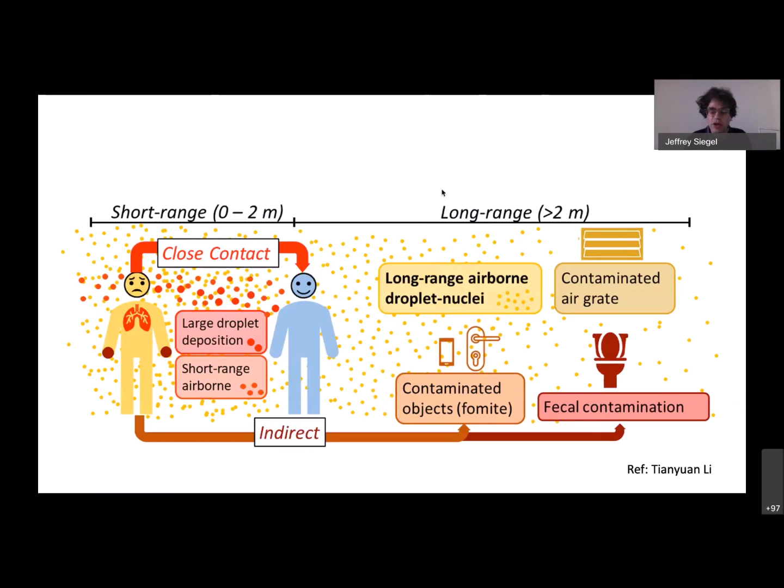We've all seen lots of figures like this one before, but I want to make a very big picture point here. There are different ways that this virus can be transmitted between an infected and an uninfected individual. There's been a lot of discussion of close contact, there's also been discussion of longer range airborne transport, and then there are some other indirect routes, one of which I'll comment on later. But the reason I wanted to show this is we're really dealing with a multifaceted problem here, and we should consequently take a multifaceted solution.

So even though I'm going to be making the case for filtration and ventilation, I want to say something that Kevin said at the very beginning, and it is really important: there are no silver bullets here. All there is are risk reduction approaches, and that Swiss cheese approach, where you're trying to have many layers so that the holes don't line up, is really critical.

But even though I'm going to be making the case for filtration and ventilation, I don't want anyone to come away from this thinking that they're magic, that they deal with the risk. They are layers of supplemental risk reduction. They can be very important in some environments, some of those higher risk environments that Tom was talking about, but they're certainly not a replacement for things like masks, physical distancing, and I'll talk a little bit about surface cleaning and so on.

The other comment I want to make about filtration and ventilation is that it's insufficient to just have a filter or to have ventilation. You have to do them well. And so a lot of this talk today is going to be about what do I mean by that, what do I mean to do them well.

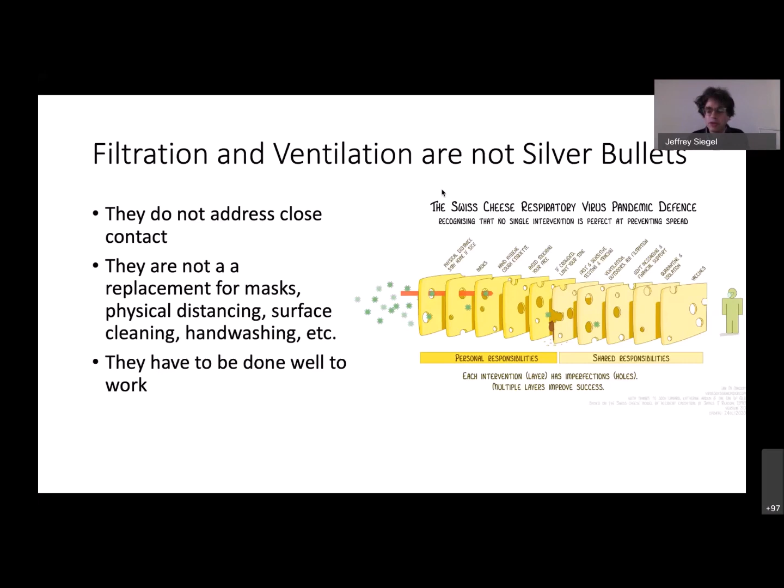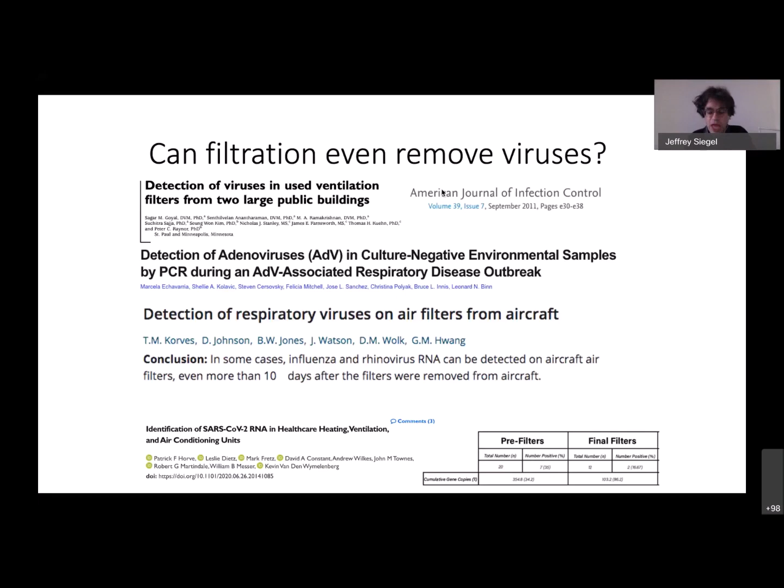The other comment I'll make, because it came up in the discussion earlier today, is that I encourage people to look at an ASHRAE standard, for example ASHRAE standard 62.1, the commercial ventilation standard. If you look at the main table that tells you what ventilation rate you need for different environments, there's a little footnote in that table — footnote B. That footnote says the numbers in the table that ASHRAE says you need to provide for ventilation are not intended to provide protection against infectious disease. They're meant to provide acceptable air quality.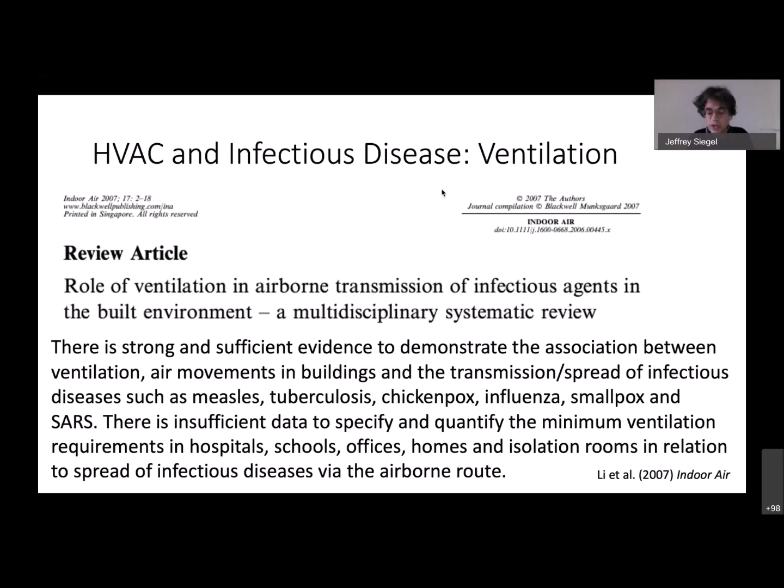So now let's go back to filters and talk about how we make them work well. There are three pieces to making filters work well. The first thing is you have to get whatever you're trying to remove to the filter. The second thing is that filter, or whatever air cleaning device you're using, has to remove the virus from the air. And the third thing is the filter has to contribute substantially to removal in the room. If it doesn't contribute substantially — if there are other loss processes, for example ventilation — then the filter might not offer as much benefit.

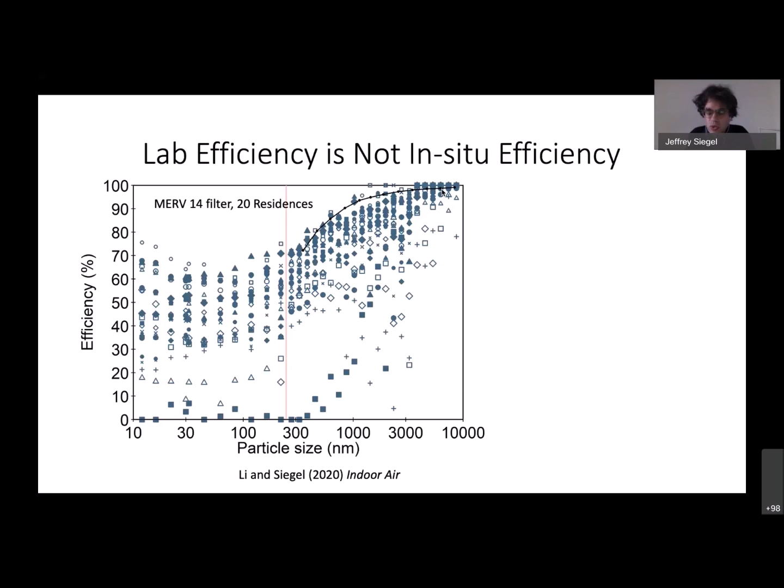You can see, and the reason I wanted to show this picture, that in many of the homes the filter is performing worse than we might expect based on its MERV rating or efficiency. In some homes it's working much, much less than we might expect. There are a lot of reasons why this happens, but one of the big reasons is something called bypass.

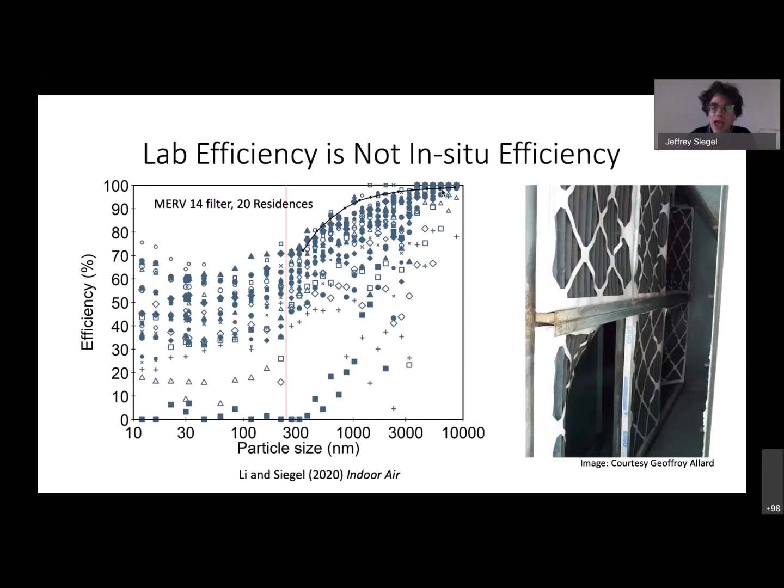Using ventilation well has a different set of challenges. Very often there's a capacity challenge — you would like to ventilate more, but it's hot outside, or even more commonly it's cold outside, or even more commonly it's hot and humid outside, and you just don't have enough heating or cooling to handle additional ventilation. So there's a bunch of solutions you can use here: you can limit the ventilation when you don't have the capacity, or you can provide additional cooling, or in rare cases maybe heating, to allow for increased ventilation.

There's another concern around humidity.

The first issue is that when humidity is low—imagine a cold winter day in much of Canada, it's relatively dry outside—the more you ventilate, the drier it gets inside. And when it's dry inside, those little respiratory droplets that contain the virus lose water through evaporation and become smaller, so they can remain airborne for a longer period of time and potentially drive infection. There are other problems too: we become more susceptible to most respiratory diseases when our mucous membranes are dry because the air around us is dry. And then there are comfort concerns as well—if things get too dry or too humid, we don't feel comfortable.

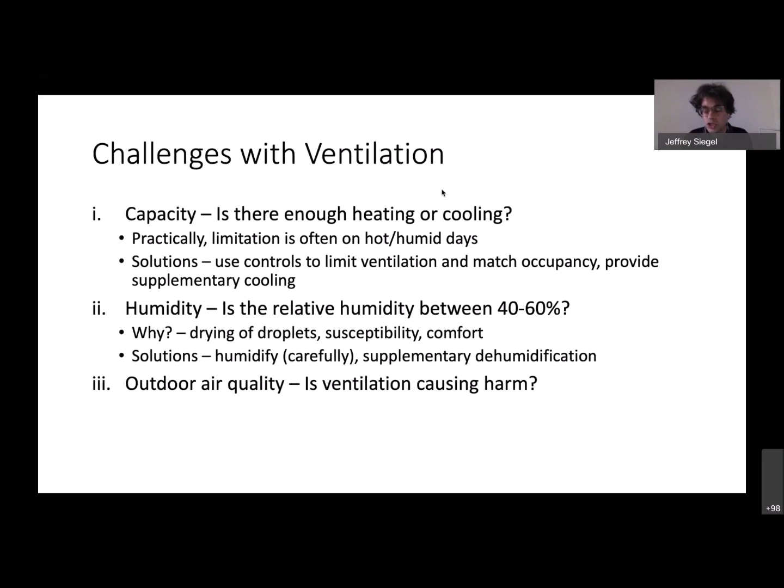Now I want to talk about humidity, because there are a lot of interesting issues around it. It seems like an obvious thing to do is in the dry winter, humidify—that's what many of us do. The problem is humidity comes with harms too, or humidification comes with harms too.

Perhaps because of that, some people use evaporative humidifiers instead—that's what I have in the central system in my house. But if you look at the data, evaporative humidifiers are often not very effective; they don't actually raise the humidity that much. The real solution here is something called steam humidifiers. They're much more expensive, they've got scald risks, and they have to be maintained well. But if you really want to change humidity, that's the way to do it.

Any humidifier is going to need maintenance—ideally you should use distilled water. And remember that we have other risks besides COVID, and moisture problems are a very serious risk, especially for children in buildings. So you can't just humidify without managing that risk as well.

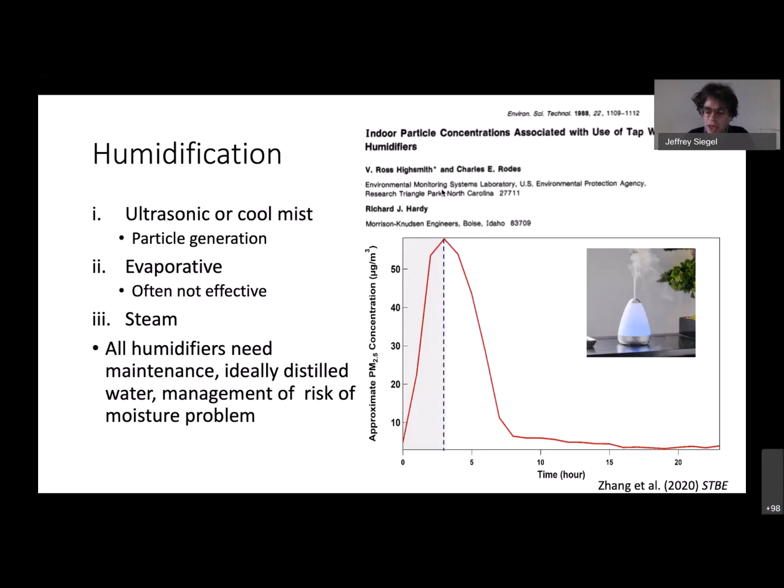And this thing is tiny in scale, so you can understand that larger scale humidification can be a risk as well.

Tom did a great job talking about airflow, but another thing I want to talk about with ventilation is that you really do have to think about the distribution. People who think about airflow in buildings think about this a lot.

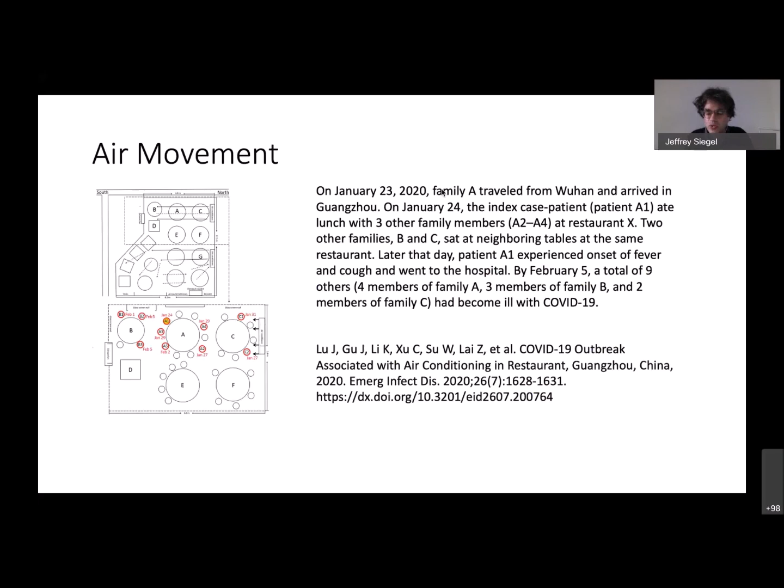I don't have to talk a lot about it because you just heard a lot of great things about it. But I would point out, we don't have a smoking gun here yet, but we are seeing in different places in the world some possibility of inter-unit transfer in multifamily buildings, where air can go through something called the stack effect, through open chaseways or open passageways between floors and buildings. These can sometimes be associated with plumbing, and sometimes associated with things like elevators. But you have this ability to move air between different spaces in a building, and potentially the virus as well.

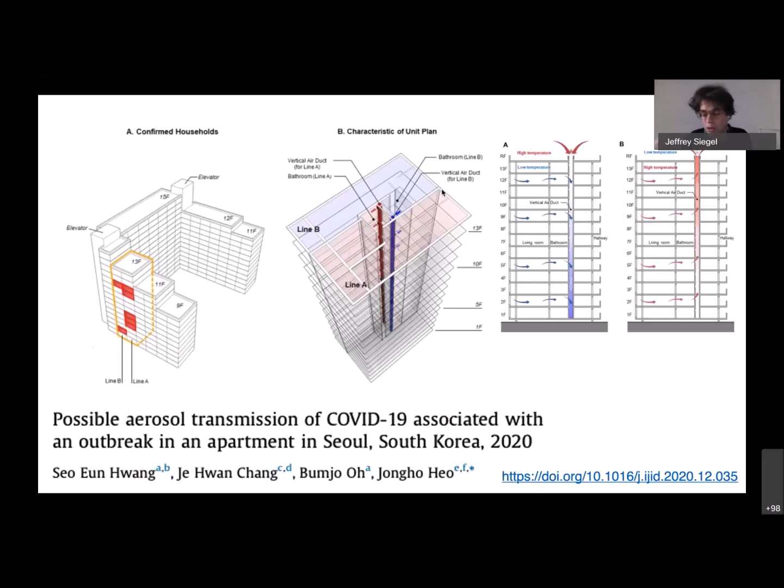So there was just a question about air cleaners and how do you know what type of air cleaner you should use. And I hope we get back to that question in the Q&A.

But I do want to take a moment here to talk about the fact that there is this proliferation of air cleaning technologies. For the record, these air cleaning technologies have been around for as long as I've been studying indoor air, and much, much longer than that, in fact. The tricky thing here is they go by different names, and sometimes the manufacturers make up names and other things, but some of the common ones are photocatalytic oxidation, plasma ionization.

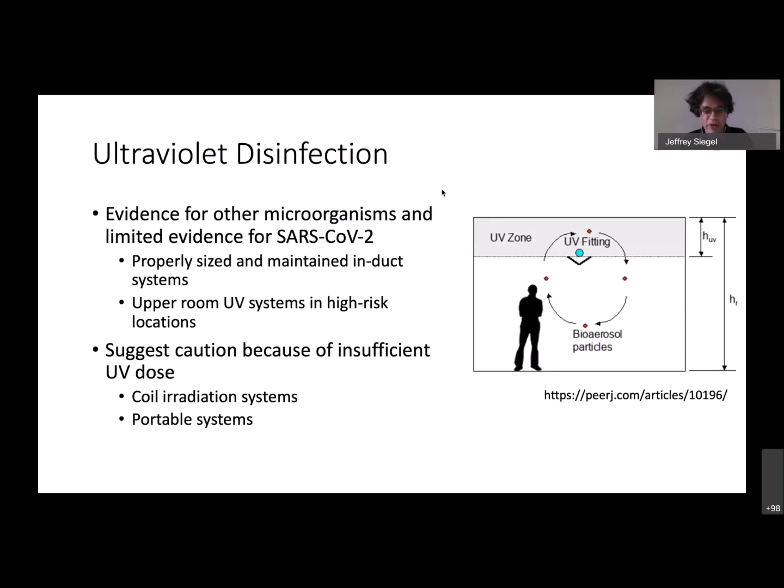So I want to make a point about UV lights. As I said, there's a whole list of things that you have to consider in doing them well. But the one point I want to focus on, in this sea of concerns or sea of things you have to pay attention to, is relative humidity.

So this just goes to show that even UV, which can work if it's done well, you have to think about the broader context and the environment in which you're using it.

I want to finish by talking about a few occupational concerns, something that hasn't been talked about today yet. Throughout this pandemic, I've read lots and lots of papers, and we've had a lot of bad news this year, let's be honest. But this is the only time where I read something and thought, oh, this is really a problem and we're not talking about it at all.

So this is a paper that's quite complicated, quite a good paper. The upshot is they looked at how flu could be spread—this is for flu, not SARS-CoV-2. They did this by taking different guinea pigs, some infected with influenza A and some not, and looking at how they spread the disease.

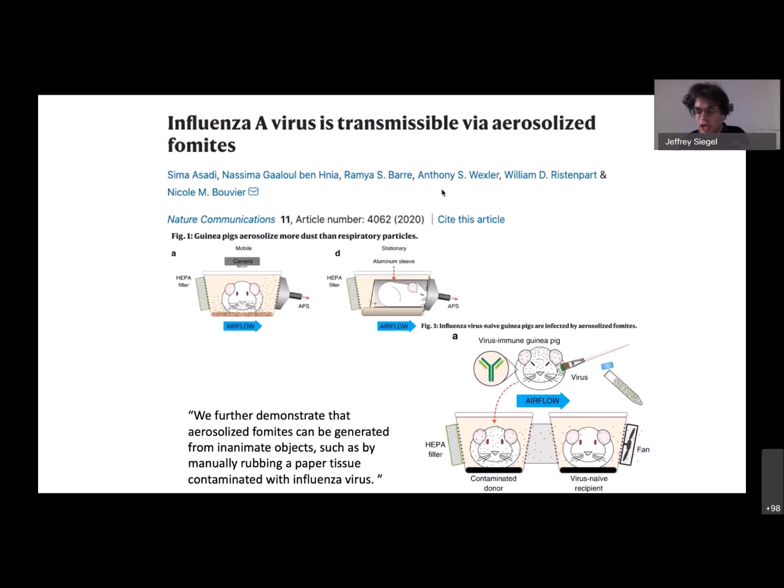So I think this is really important, and it's unclear how important it is in all environments, but there's certainly potential for concern in occupational environments. Even though there's been a diminished focus on surface transmission, and that may be appropriate, I'm going to suggest we might want to pay a little more attention to that in some environments.

We know that environments with high temperature, sunlight, or low relative humidity are all good for reducing the infectivity of this virus—and viruses in general—on surfaces, as well as just time. But we also know there are certain activities that can cause particles to resuspend and bring those infective particles off the surface.

Another article earlier in the pandemic that gave me a little pause was some work from a hospital in Wuhan. To date, the highest airborne concentration of SARS-CoV-2 that I've seen in any article in the literature is in the room where staff donned and doffed PPE in this hospital.

So you can imagine that the action of taking on and off PPE causes some of that virus to go into the air.

Now, this article—and it turns out in general—it's quite hard to measure infectivity, so we don't know if this is actually an infective risk. Just because the virus is there doesn't mean it can cause disease. So I'm not saying this is the end of the world, but from the precautionary principle, you really need to pay attention to this in some environments.

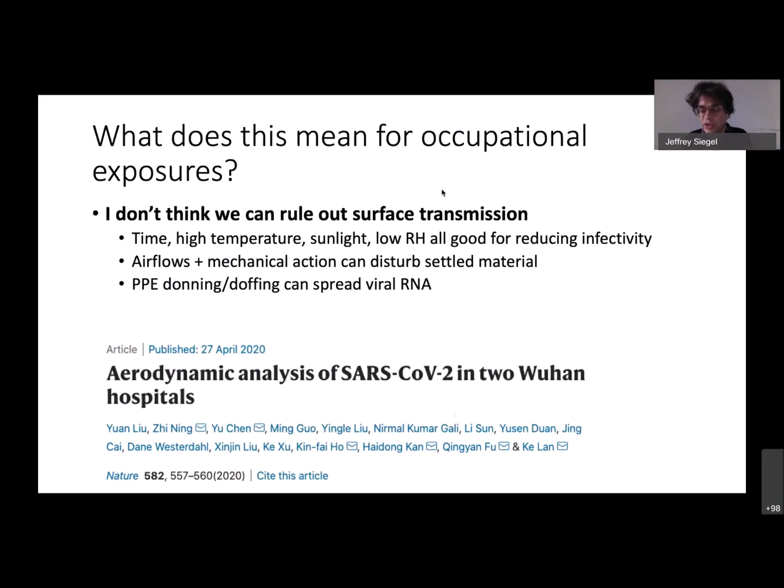So to the extent you can, don and doff PPE outdoors, especially in environments where there's infection, and treat environments as high risk where there's airflow near surfaces—fans and so on—and movement that might resuspend particles. Again, we don't know how big this risk is, but I think we're doing a bit of a disservice, especially in some environments, by ignoring it altogether.

So if I were to wrap up everything I just tried to say, make sure you're using a good filter, whether it's portable or central. Make sure lots of air goes through it, and change it frequently. Remember that the filter is capturing viral material, and it's unclear whether that represents an infectious risk, but treat it as if it does until we know otherwise.

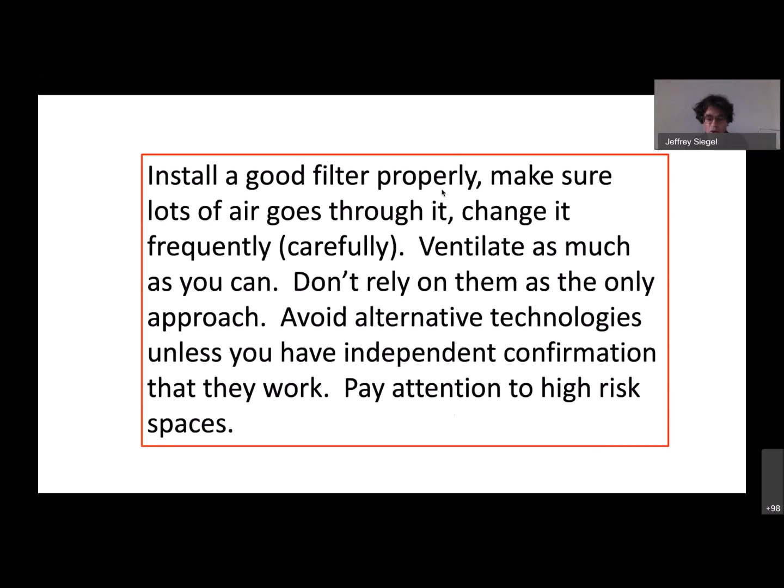Ventilate as much as you can, paying attention to the possible negative harms. But don't use filtration and ventilation as your only approach. Watch out for any of the alternative technologies unless you have independent confirmation that they actually work, and that they'll actually work in your space. And of course, pay extra attention to high-risk spaces, either because they're poorly ventilated, because people can't take primary measures like masks, or because there's crowding, or any number of other risk factors.